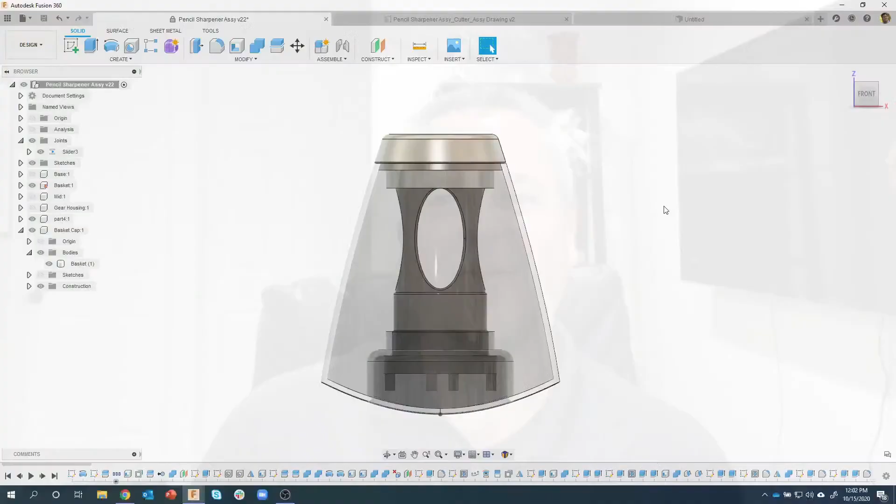So I'm going to start out by going over something you eagle-eyed viewers pointed out last time. We created this cap, and some of you mentioned that this edge was tapered, and so if we were to try and assemble this together, you would notice that that would be physically impossible. So kudos for those of you that saw that. I didn't take that into consideration. So how would we go about fixing this?

So what I'm going to do real quick is turn off this basket here. And one of the things I would probably do is try and take a measurement. So I'm going to try and find out what this angle is. But you'll notice when I click on those two faces, it doesn't give me an angle result. So I don't know what angle that is at. So, you know, I could have tried to rotate the face or added some draft or something like that, but I don't have that option.

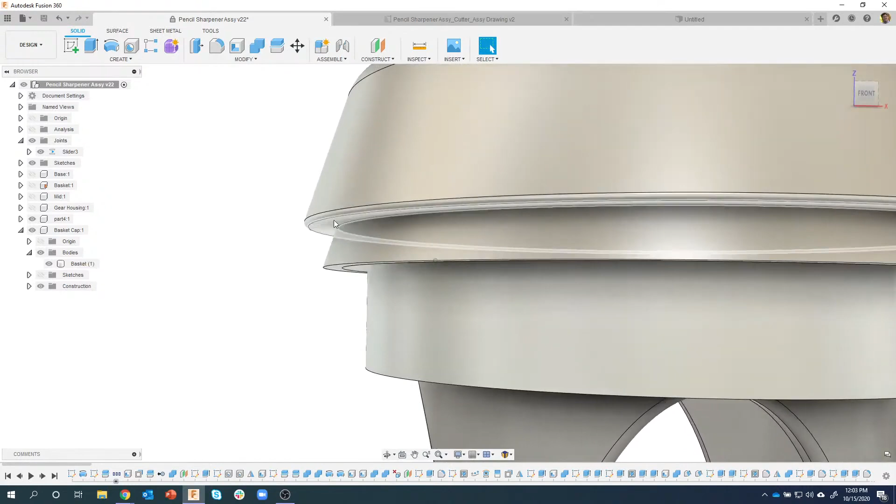So here's a cool little tip that allows you to quickly fix something like this. We're actually going to use surfacing to do this. And there's a command in here called Extrude. Now it's asking for a profile, and you'll notice it doesn't let me click on an edge. It only lets me click on a face. So I'm going to click on this face right here, and I'm going to start to drag up. Now what's kind of hard to see is that it's actually just a thin sheet. There's no thickness to it. And this will make more sense here in just a second.

So I'm going to drag it up, and I'm going to go at least to that height. I could go further if I wanted to, but I'm just going to go ahead and click OK and watch what happens over here. Actually, let me do that again. I'm going to make sure my basket cap is the active component. So we'll do that again real quick.

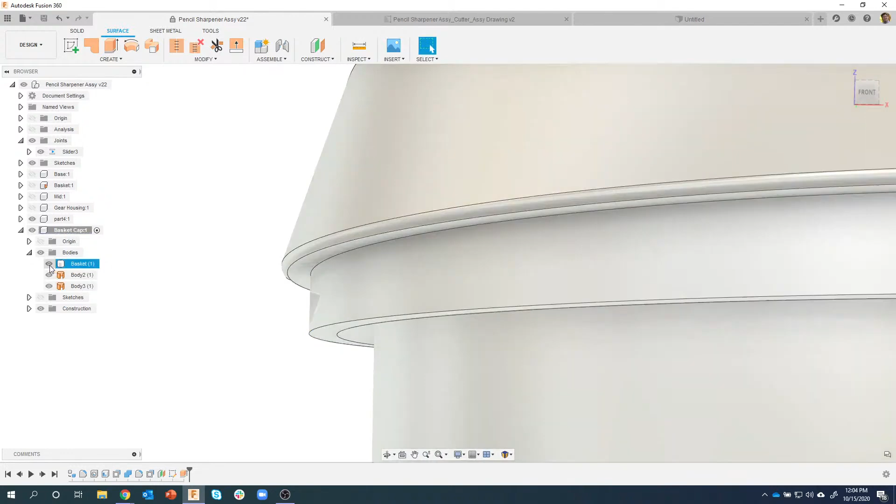I'll say extrude. I'm just going to snap to that face, say OK, and we can see that it added two separate bodies. In fact, if I turn off this basket, you'll see that there's no thickness to them. It took those edges and extruded it straight up. And that's pretty much what we want. I don't need this inside one, so I'll just go ahead and remove that.

And then I'm going to jump back and use one of the commands I've been using quite a bit lately that I really like, which is this replace face. So we're going to use this surface to help us replace that angled surface. So what's our source? It's going to be this angled surface. What's our target? I'll click on that guy there, say OK, and you'll notice that now that face is straight up and down. We used that surface to help us out with that.

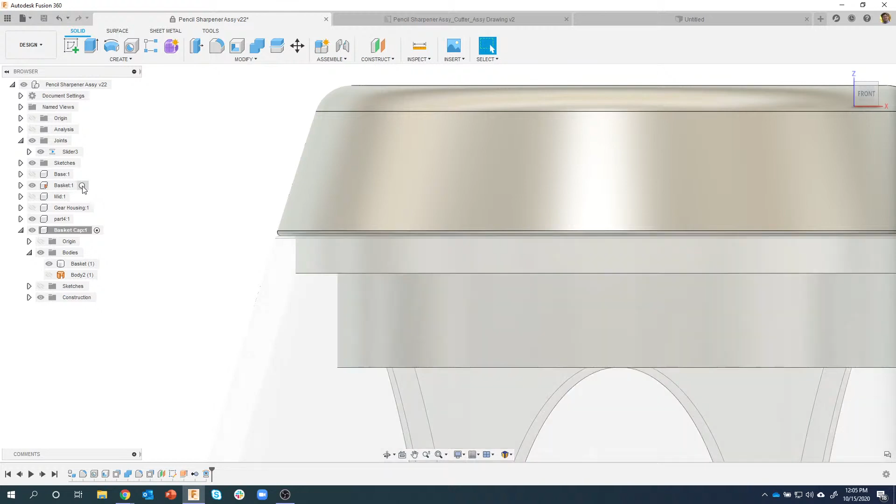So now let's turn the basket back on, and now you'll see it's still going to hit. So we need to make a slight change to the basket to allow some clearance there. So I'm going to activate the basket because that's the model I'm going to be modifying. We'll come in here and combine these two parts, and we'll use the cut command. Now I obviously want to keep the tool, so it's going to use this one that's kind of highlighted in red. It's going to use that to subtract or cut some material out of this blue part here.

So when I say OK, we can now see that we have a straight wall and we can slide down into that opening there. And if I wanted to, I could come in and add a little bit of an offset to this face here just to give it a little bit more clearance. So anyways, that's a quick way of fixing a problem, especially when I didn't know what the angle was or anything like that. So, okay.

What we are going to work on today is the sharpener part of the pencil sharpener.

And I'll be honest, this one kind of threw me for a loop. This one was kind of tough to make, and I came up with a couple different ideas. There's probably multiple ways we could do this, but this is one of the ways I came up with, and we might go a little bit long because there's quite a bit of geometry on this guy, so bear with me, and let's dive right in.

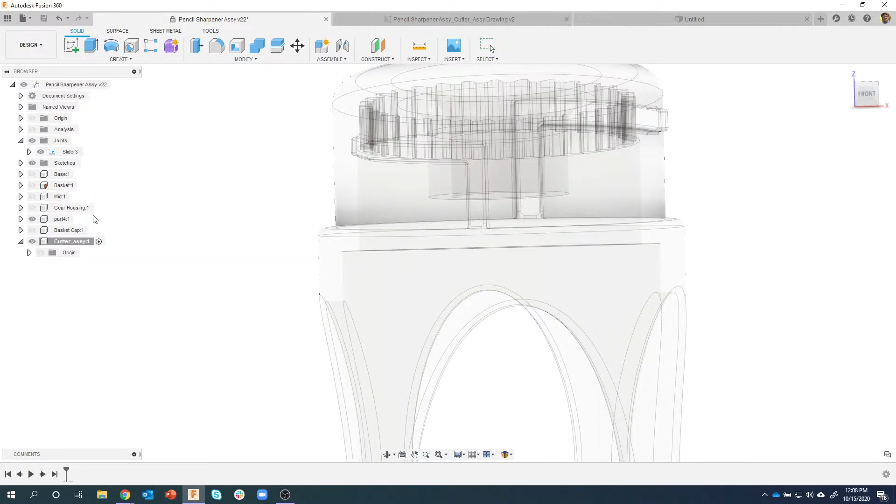So I'm going to start, it basically kind of fits around this little area you see kind of in here. So I like to do this in context design where I'm using existing geometry to help me with my design. So I can come in here and say create a cylinder primitive, and then I'm just going to get near that bottom face right there. You can kind of see how it's kind of highlighting that face. And then I can draw my cylinder.

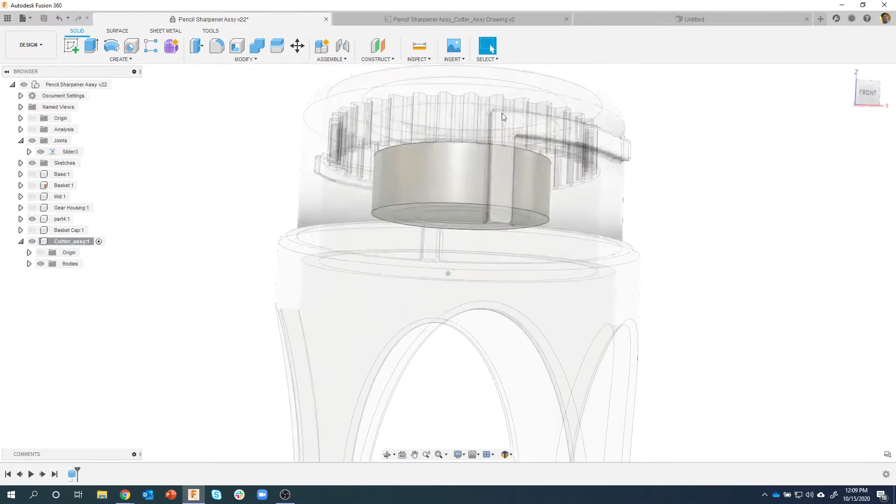So we're creating a primitive that's right on the bottom of that existing geometry, and I want this to be 0.625 in diameter, and I'm actually going to go up this direction, so it's in the negative direction in this case. So I'm going to say minus 0.2. Okay, so we're kind of using that existing geometry. You can see the existing geometry there and the new geometry that's kind of wrapped over it. So now I have something I'm starting with. I don't really need this part 4 anymore, so I'm just going to turn that guy off.

Okay, so let me bring this back up real quick. So basically what we just did is we just started with this part here, and again, I don't know how well this is going to focus, but I'm going to start building the geometry down, and then it's really kind of hard to see, but there's a tapered part that the pencil actually fits down into. So that's what we're going to be creating next.

And again, to simplify things, I like to use these cylinder primitives because I don't have to create a sketch, then create a circle, then do an extrude, and that would be 3 different features in my timeline, whereas in this case, I can pick on the existing cylinder, it knows where the center is, I can say it's 0.5 in diameter, I can start to drag and specify the depth. In this case, according to the drawing, it's 0.07, and you'll notice it's just a single feature in my timeline, so it keeps my timeline simpler.

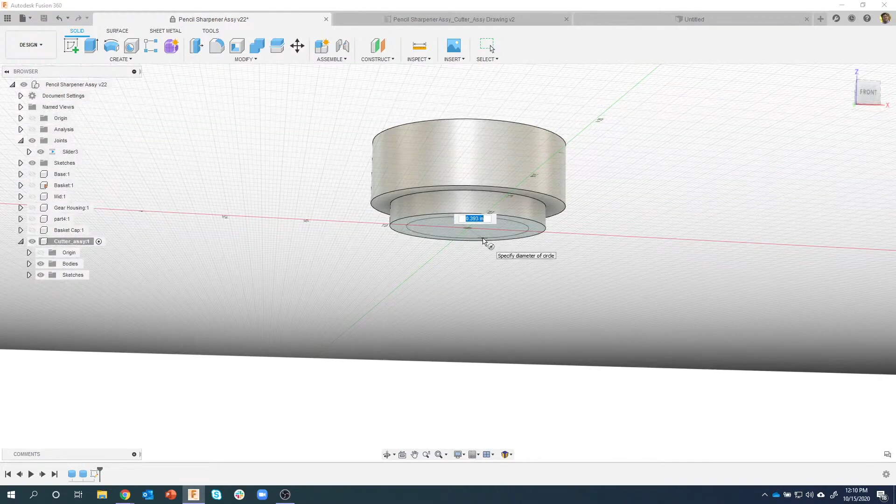And I'll do one more of those. I'll do a cylinder on this bottom point right here, and let's just go 0.795, and this is a fairly thin part, so I'm going to say 0.05. And you can see, again, this is that stacked cake method that we talked about last time. And if I look at the drawing real quick, here is what we just did, the diameters and the different thicknesses. So we did this guy, and then it's kind of hard to see, but this little thin one right here also. Okay.

Obviously we need a hole for the pencil to get inserted into. Again, I could create a sketch, but instead I'm going to pre-select that face, right mouse click, and you'll notice that the hole command is in this little pop-up. So I'm going to say hole, and it just randomly put it where I clicked, so it's not centered. So what I like to do is drag it, and then you'll see that point right there appear, and all I have to do is get near it, and it's going to snap to that point. And so it's perfectly centered.

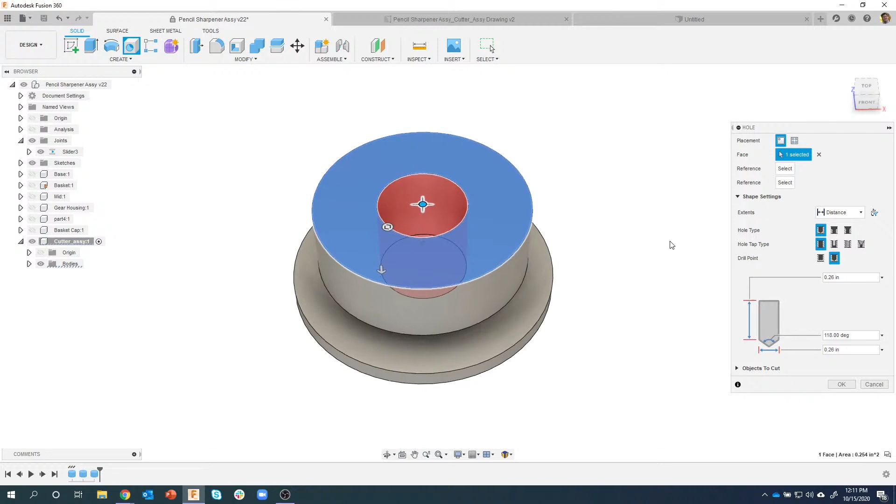Then I come in and I can say I want a flat drill point. I don't need it to be sharp. I want it to be flat. I'll specify the diameter in this case is 0.485 from the drawing.

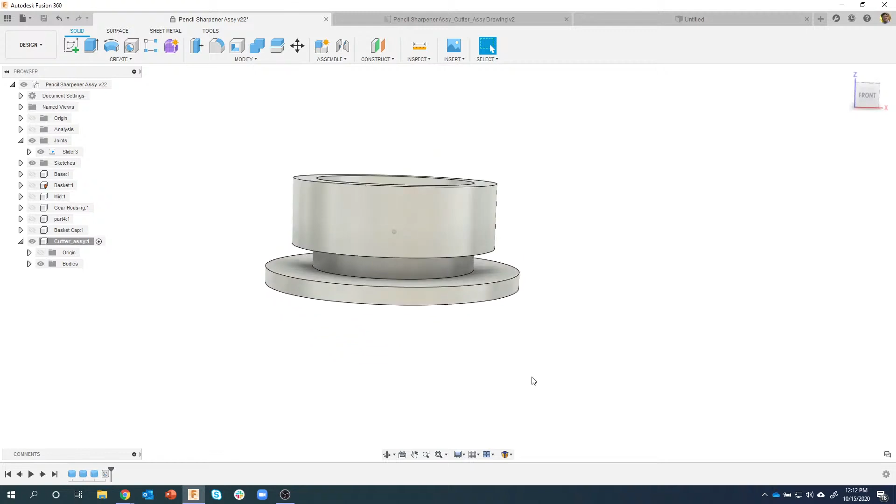And I want it to go all the way through. And you'll notice it says distance. Well, just like in the extrude command and some of those other commands, you can specify a distance, you can go to something, or I could say go through all, and you'll notice that it's going to figure out and go through all for me. So I now have a hole that goes all the way through. So simple timeline, and not a complex part, but you can kind of see we got some geometry going on here.

Okay, now we're going to create that tapered portion, and again, it's kind of hard to see here, but you can kind of see it tucked in all these little ribs right here, and you can kind of see part of it here. You can see it's an angle of 12 degrees, so that's going to come into play here real quick.

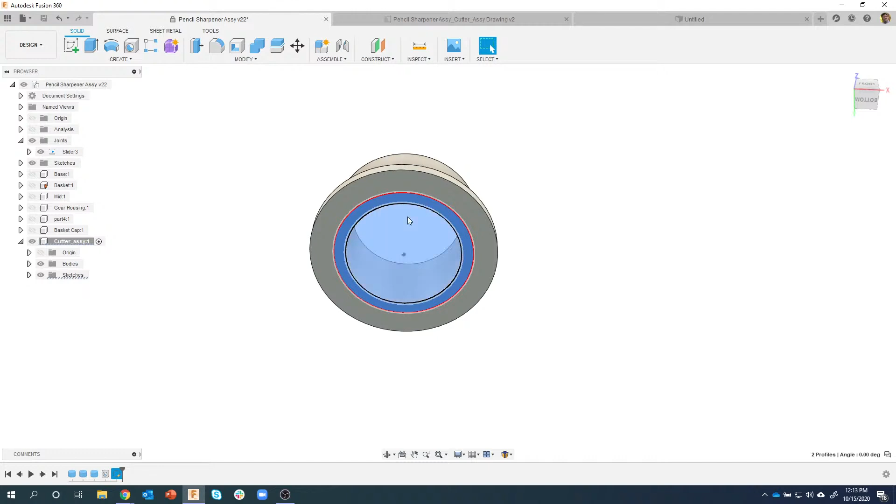Okay, so now I do need to create some geometry. I could do this as a revolve, but in this case I'm actually going to keep it simple, and I'm going to just create a sketch, draw a circle, because I know what the overall diameter is supposed to be. So 0.585, so we can kind of see what that looks like. And that's it. I'm going to, again, keep it pretty simple. I'm going to select both of these and say extrude.

Now, if I start to drag, we'll see it just creating a simple extrusion. But you'll notice that built into the extrude command, we have this taper angle. And that's kind of what this little rocker thing is right here. So you can kind of see as I drag this, I can actually change the taper angle. And again, according to the drawing, it's minus 12 for the angle.

And then the overall distance I want to go is 1.25. So we extruded down 1.25 at an angle of 12 degrees, a taper angle of 12 degrees. So you can kind of see how it's creating this point for me automatically.

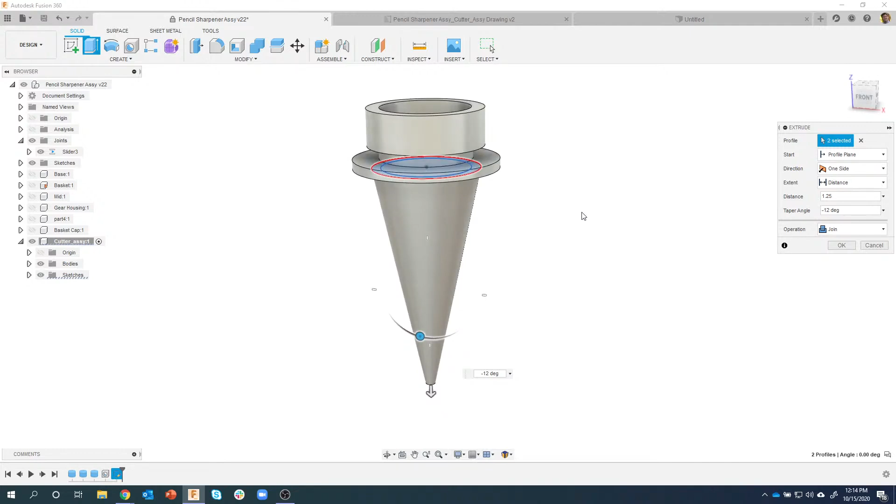Now, I've shown this previously in other live streams. I like to build in context, but sometimes I like to break things apart or keep things separate and then combine them back together. And so I'm going to be working on this part here. So instead of joining it, in fact, let me expand this open over here, I'm going to say new body. I'll say OK.

And now you'll see we have that region up there. That's its own body. And then we have this guy down here that's its own body. And that's going to allow me to make some changes to it, run commands like the shell command, for example, that I don't want to affect the top part of this whole area right here.

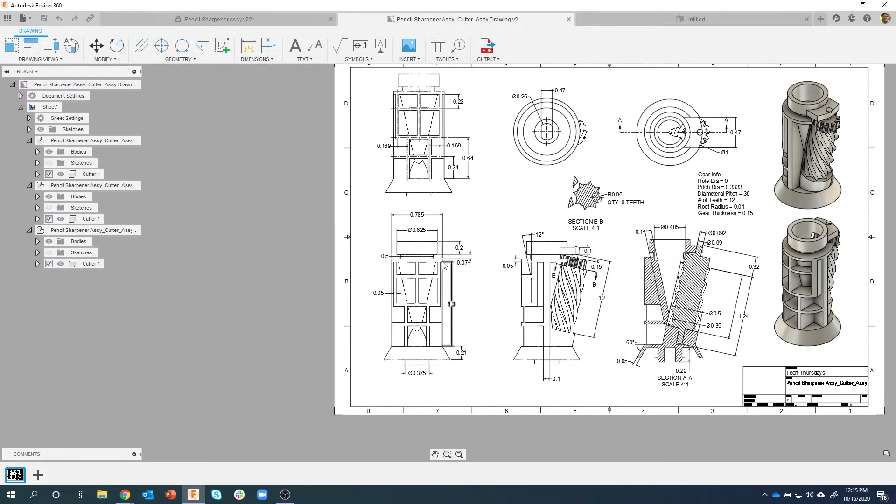Okay. Let me show the drawing here. There is a rectangular rib you can kind of see right here that's going to kind of go all the way across and slice through this area right here. So I'm going to create that next. And to do that, I should have stayed on the drawing. We can actually see that it's 1.3 inches. So here's the bottom of that rectangular rib. It's 1.3 inches from right here.

Well, if we take a look at this, we came down 1.2 inches. I need to go a little bit further. I want to create a sketch that's actually kind of below this point. So we're going to use the construct offset plane. So go ahead and click on that guy. I'll click on this face, and I'm going to start to drag, and you can see I can specify a distance. So I'm going to say 1.3.

And if we look at it from the side, we can definitely see that that's kind of below that point. So we're going to create a plane that's 1.3 down. If we look at it right from the side, you can kind of see that's where it is. Now I can create a sketch on that plane. So it's a great way to put a sketch somewhere that's not physically on the model.

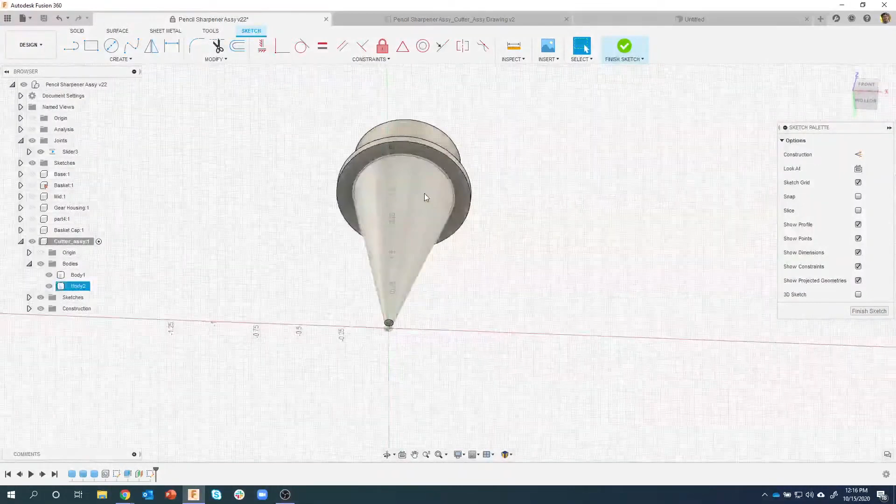In fact, I'm just going to kind of look at it from the bottom here, and I'll just create a rectangle, I'm going to do a center rectangle. Click on this guy, and I'm just going to go ahead and make this 0.1 wide. And you can see when I hit the tab key, it kind of locks in the width. So you can see that little lock icon next to the 0.1.

Now I'm just going to click somewhere on the screen to kind of show this. I want this to be on this edge right here. So I'm going to do a tangent constraint. I'll click on that edge there, and I'll click on this edge here. And you'll see it'll jump, hopefully. Yep, there we go. It'll jump that line up onto that edge. It made it tangent to that edge.

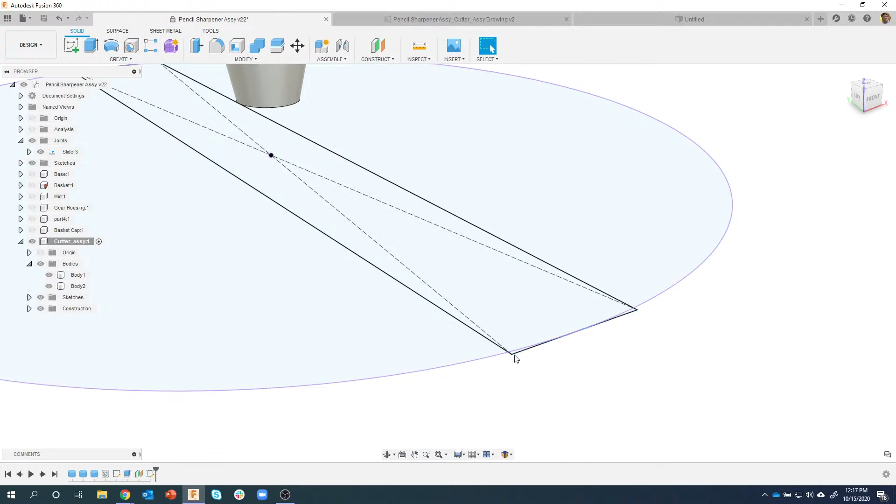Okay, so now I have this rectangular shape, and you'll notice, for you eagle-eyed people there, it extends out past it, but we're actually going to grab this profile, and it's going to use that curved edge. So it's actually going to follow that curved edge. I'll say extrude. I like to start to drag up, and you'll notice as we're dragging up, it's wanting to cut. But I don't want it to cut, I want it to join. Okay? And I want it to go up to that face. So I could click on that face and it'll snap up to that face, that 1.3.

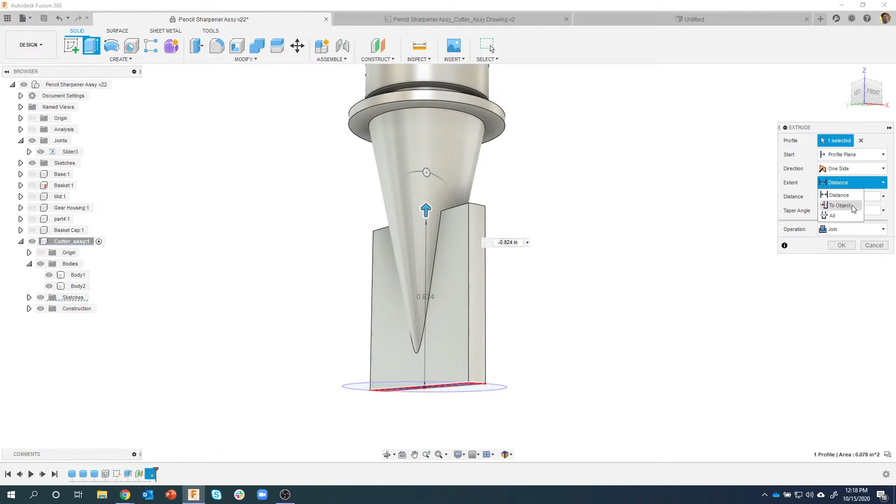Or better is to say to object. And I'll just click on that face, and it's going to extrude up to that object, that face right there. And the reason that is better is because if this thickness were ever to change, this rectangle knows it's supposed to stay stuck to that object, wherever that object might be.

Now, here's a little tip. So it says join. Well, notice it's touching this part here, but it's also touching this part here. So which part is it going to join to? So in this case, I'm going to turn off that guy. So the only option it has is to join to this part here. So just a little bit of a tip. You might want to turn parts on or off to make sure it's joining to just what you want. So I'll say OK. And we now have an interesting looking shape that looks like that.

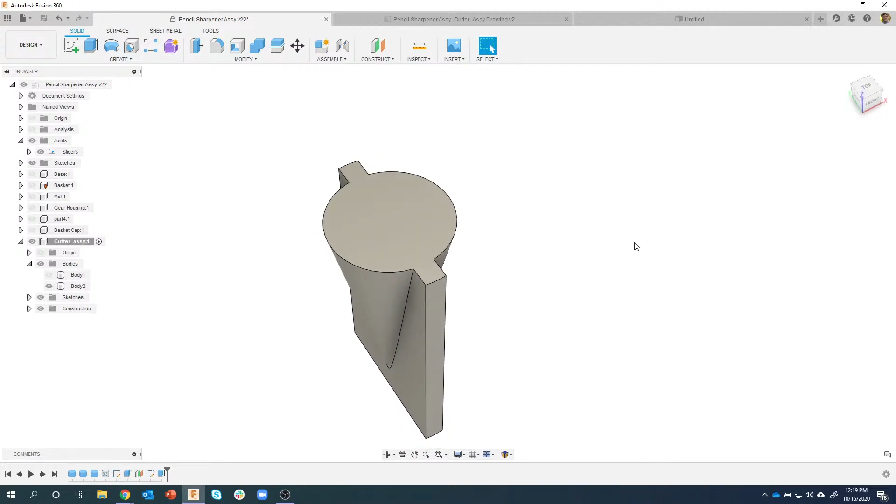Okay. Now here you're going to see why we made this a separate body, because now I want to, again, make it so a hole is in here. We're going to shell this out so the pencil will fit in here. So I'll come in here and pre-select that face and say shell. I'll start to drag so we kind of visually see what that looks like. But in this case, the thickness is 0.1. So you'll notice it's no longer shelling this little area here because this is 0.1 in thickness, so there's no room for it to shell. And so we get this nice little hollow cone shape.

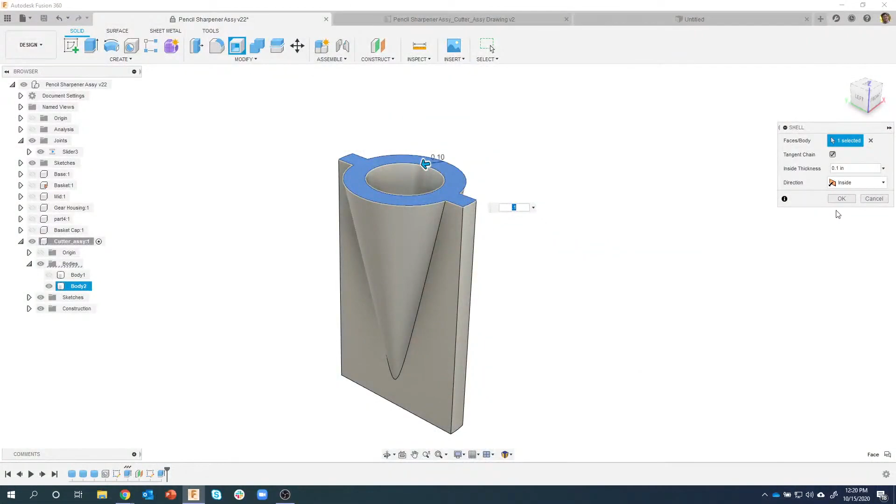So again, I could have done this with a revolve, but then I would have had to create lines at an angle, offset those, create an axis, revolve that around, etc., etc. Multiple ways you can get this done. Okay. Let's take a look at that.

So the next thing I want to do is I want to add this feature down here. And we can kind of see it's actually shelled out, and there's a cylinder inside there with a slot in it and all this kind of stuff. So let's kind of work on that area. So again, I'm going to keep it simple. I'm lazy like that. I'm going to do a cylinder primitive. I'll click on that face. I'll click on that center point right there and start to drag.

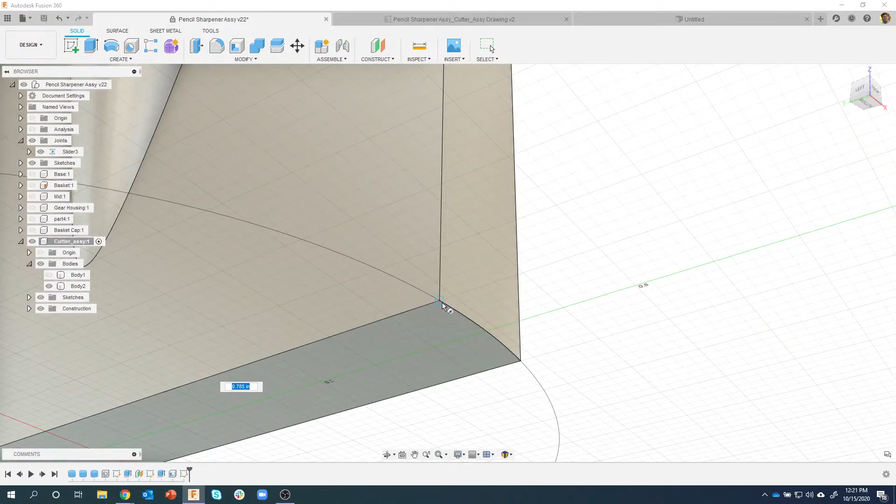Now I want it to be a very specific size. I want it to match that edge. And so you notice I can just get near that edge and it's going to snap to it. In fact, I could get to that corner if I wanted to. I'll go ahead and click. And so now it's going to match that curved rectangular extrusion. This guy here is supposed to be 0.21.

And again, I'm going to shell this guy out. I don't want it to affect this. So instead of join, I'm going to say new body. I used information from this other body to create this body, but now you'll notice that we actually have 3 of them. I'll turn this guy back on. You'll see we've kind of broken it into 3 different chunks. Okay.

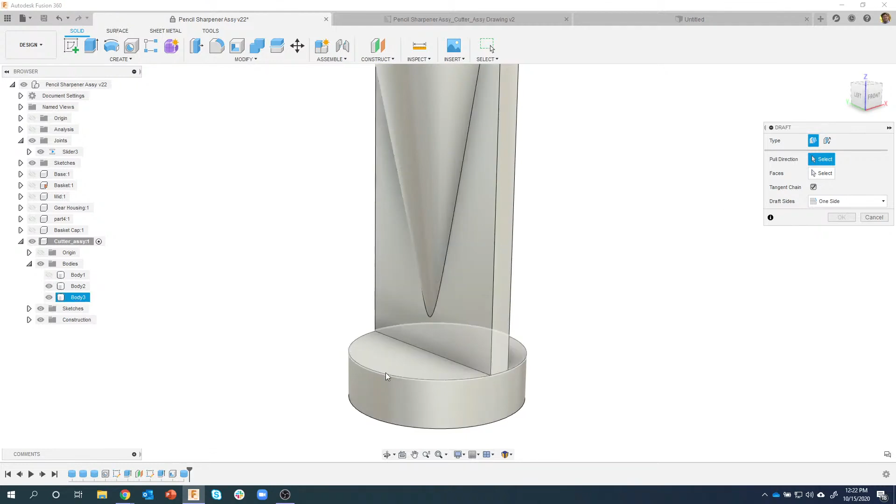Okay. I also want to taper or angle this. And the fastest way of doing that is with the draft command. So the pull direction is going to be this face here. You can kind of think of this pull direction as what edge is the face going to hinge around. So if I click on that face, it's going to hinge on the edges of that face. In this case, there's only 1.

What's the face? This is the face that we're actually going to hinge, or rotate, I should say. And you can see as I drag that, sure enough, it's hinging on that pull direction.

Okay. And I want to do an angle of 30. So just like before, I could have drawn a sketch, drawn a profile, revolved that around and gotten the same thing. But in this case, we just did a cylinder and then we just did a draft. And what's cool about this is I can come back and change the angle of this draft at any time if I needed to. Much simpler than going into a sketch to do it.

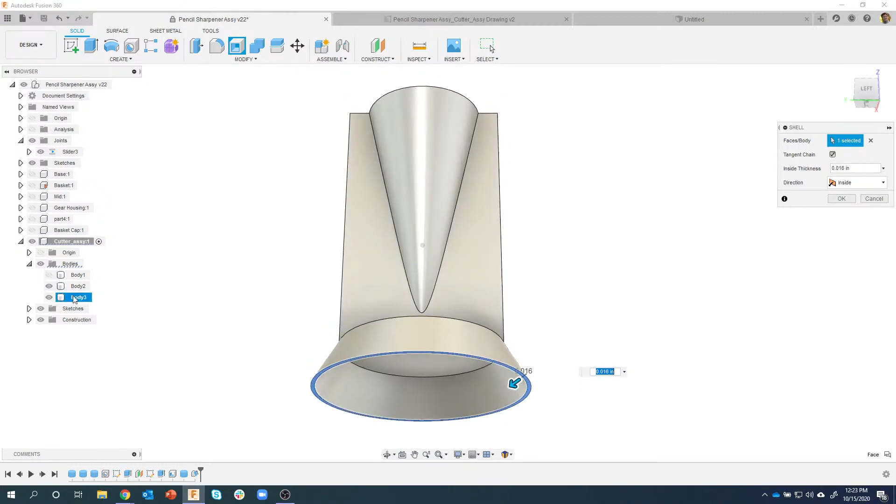Okay, I'm going to, again, pre-select, right mouse click and say shell. I'll start to drag and you can see it's only shelling this body. In fact, I'll turn this other guy off. It's not affecting that other part because we're only working on this particular body. That's kind of why I break these into smaller chunks. Okay, 0.05 is the thickness for that. I'll say OK.

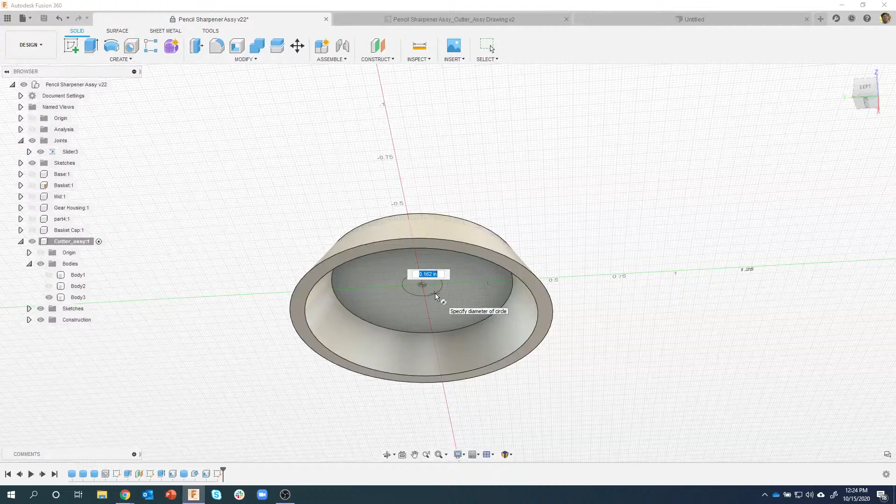And then I want to create this cylinder right here. We can see that it's a cylinder with a slot inside of that. So we can see it's 0.375 in diameter, 0.22 in depth. Okay, so cylinder, I'll click on that face. It finds the center of it for me automatically. 0.375 for the diameter. And then for the depth, I like to start to drag just to see is it a positive or negative number. It's 0.22. There we go.

Okay. So again, think about what this would have looked like for a sketch to revolve that around. I would have had to have drawn a profile that looked like this, with lots of measurements and angles and all that kind of stuff to create a profile to revolve around. I absolutely could have done that, but I think it's much, much simpler to break it down into its simpler forms. It's a cylinder, it's got some draft, it's shelled out, and then it's got another cylinder inside of that.

We're going to learn some tips and tricks like grouping things together and organizing things as we go through here. You'll see that a little bit later, but I could, for example, group all of this stuff together if I wanted to. But you'll see that more as we move on. Okay.

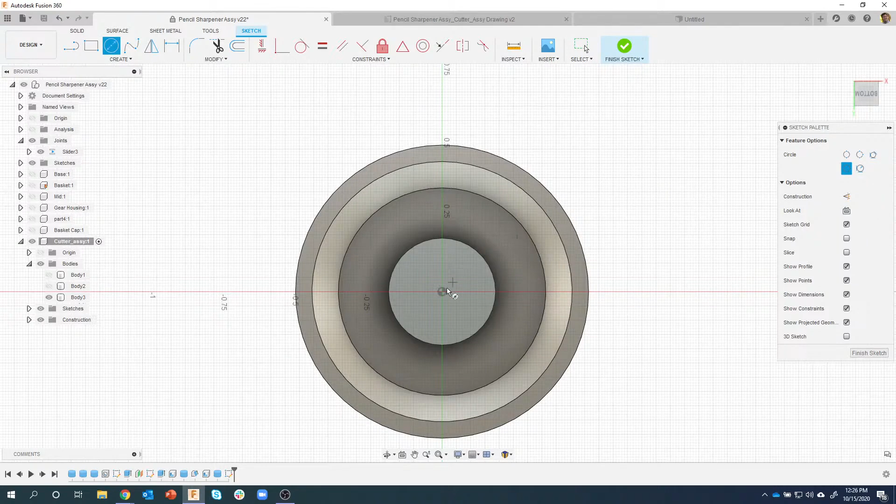Okay. So I'm going to do R for rectangle. I want to create a rectangle. Actually, I lied. Let's do a C for circle, we'll start with a circle here. And notice when I hit C for circle, it gives me all of my circle options there. If I hit R for rectangle, it gives me all of my rectangle options there. So I'm going to do C for circle. I'll click there, and we'll just do 0.25 diameter. Now I can do R for rectangle.

Now, I like to use the shortcuts, but as I'm doing these live streams, I kind of show where the menu is, because I know a lot of people are learning, this is the first time they've used Fusion, and I don't want you to have to remember all of these shortcuts, but as you get more proficient with the product, definitely use these shortcuts like O for offset and L for line and T for trim. It just really speeds things up.

Okay, so I'm going to do a center rectangle. I'll click on the center there. Now I am concerned about how wide this slot needs to be, so I'm going to tab over here and type in 0.17. Okay. Now no matter what I do, that rectangle is going to be 0.17 wide. And then I'm just going to click somewhere because I don't really care right now. I want Fusion to do the work for me. I want this corner to be touching this circular edge. So we'll use the Coincident Constraint.

You'll notice that some of my sketch is constrained and some of it is not constrained. As soon as I say I want that point to be touching that circle, you'll notice it's still 0.17 wide, but it brought that line down to be touching that circle, to be coincident with it. And because it's a center rectangle, it did the same thing at the top. So believe it or not, that one constraint has fully constrained this sketch.

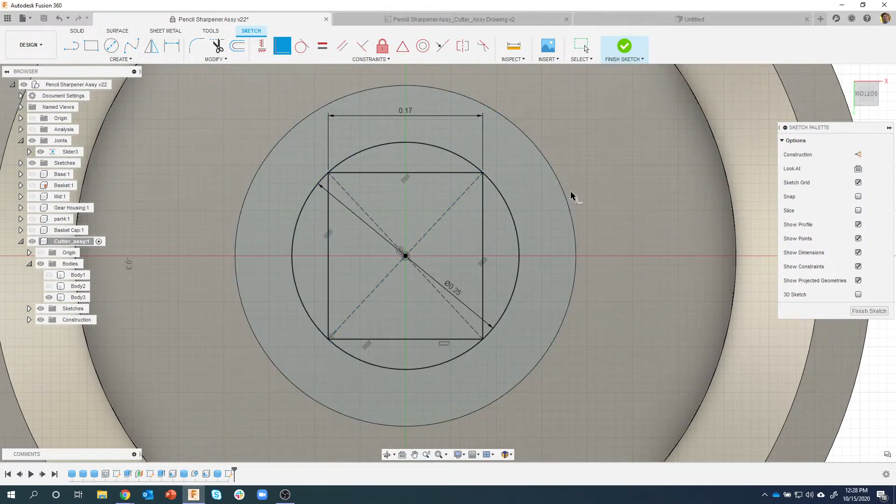And now I have a profile that I can use. I'm going to grab these three regions right there. I'll say extrude, start to drag, and we can see I could either extrude to add material, or if I push it in, it's going to remove material.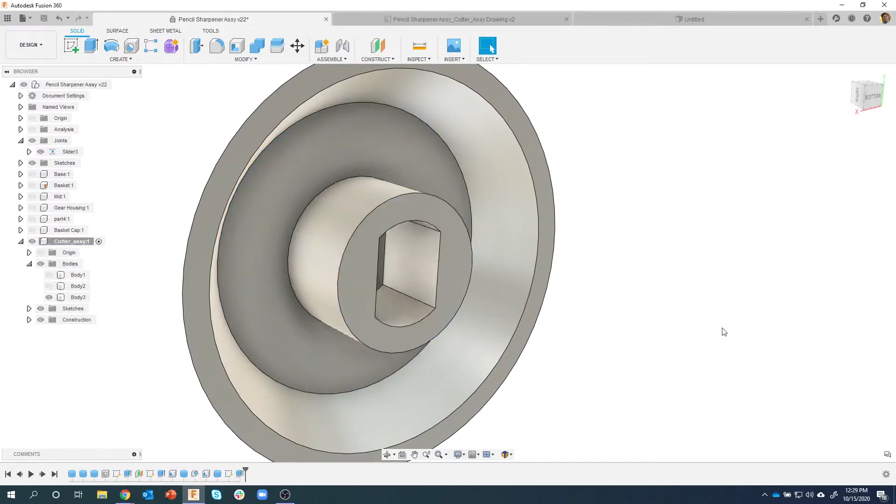And once again, instead of distance, I'm going to say I want it to go all the way to this flat face right here. So I'm going to click on that flat face, and we can see that sure enough, it's milling or cutting into that depth, whatever that depth is. So I'll go ahead and say OK, and we now have that recessed slot.

Okay, let's turn these other bodies back on. And I pretty much have the defining shape of this pencil sharpener. But instead of three separate bodies, I'm pretty much done with it, so I'm going to combine them together into one body. So I'll click on the Combine command, or if you don't have it as a shortcut up there, Modify, Combine.

The target, I'm going to click this first one, this body one. And then the tool, I'm going to click on that guy, and you'll notice it turned red. And by default, it remembered my last combine command that I did was a cut. But in this case, I want to join them together. And you'll see how these edges, there's not an edge across there anymore like there used to be. And then I'm going to go ahead and join that one also.

Now you'll notice Keep Tools is turned on. If I were to say OK right now, it would join them together, but it would also keep those extra bodies. And that can get a little bit confusing. I don't need them anymore, so I'm going to turn off Keep Tools and watch what happens to the bodies over here. When I say OK, we are now back to one body, combined all together.

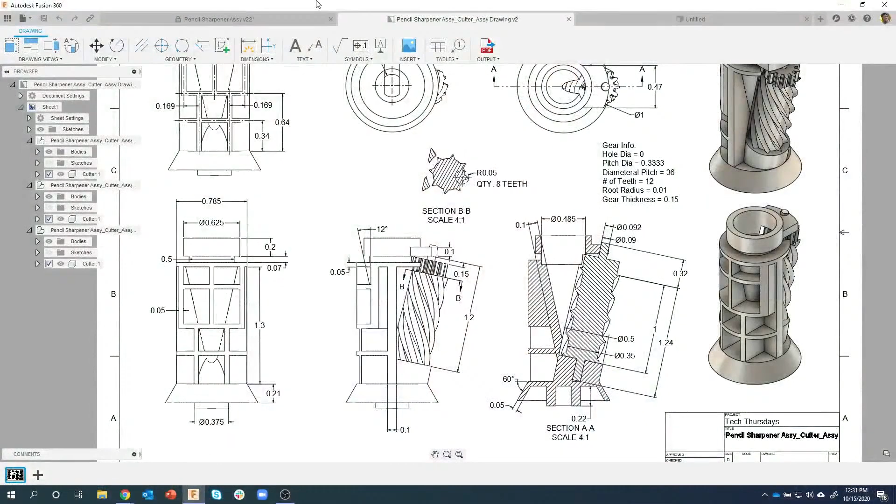So I came up with a different method, and I don't know if you'll like it or not, but we're actually going to use surfacing to do this. And hopefully you'll see some tips and tricks that you might be able to apply in some of your designs. Okay, so I'm going to come back here, and the first thing I want to do is create some geometry. But I want to basically extrude it to this part right here. So I need to create a sketch out here somewhere.

Under the Construct menu, we have a tangent plane. Okay, then it's going to ask for a face. I'm going to go ahead and click on this face, and you can see that it actually created a plane tangent to that face. And I can actually put it anywhere on that face. So it's stuck to that circular face, and in this case I'm going to leave it at 0.

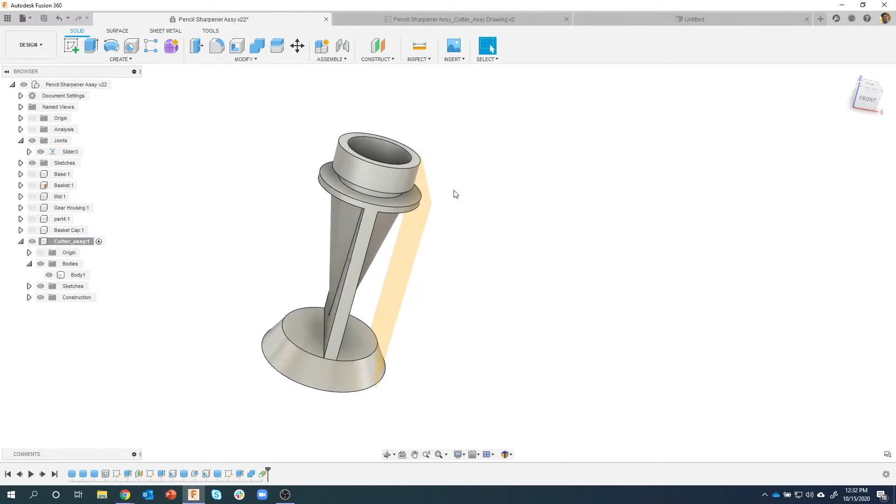But it's a really cool way of creating a plane on a circular edge at a particular angle. So I could say 45, for example, and now it's going to create that plane at a 45-degree angle. But we'll keep it at 0. Okay. So I now have a construction plane that's touching that face right there, and I can now create a sketch on that face.

Okay. On the drawing, in this view right here, you'll see a bunch of different dimensions, and you kind of see these center lines. And so we're actually going to be creating these center lines and then adding some thickness to them. So I'm going to just be referencing these numbers you see here when I'm creating this sketch.

I want to grab some information from that face, so I'm going to do P for project, and I'm going to make sure I'm doing just the specified entities, and I'm just going to grab this face. If I left it to bodies, it's just going to do the outline. I don't know if you can see that really well, but it's not grabbing any information in here for me.

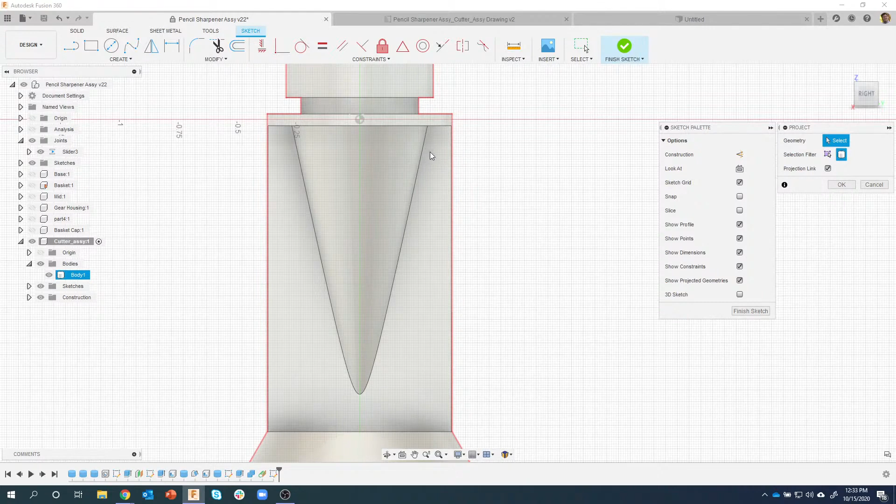By saying specified entities, I'm saying I only want to project this face. And so you can kind of see how these lines are being projected also, and nothing up here is. So I'm going to just say that's the face I want projected, and I'll say okay. We can now see those dots on the corners and the purple lines.

So I'm just going to draw a couple quick lines here. Now you'll notice it'll automatically catch to the center here, and in this sketch you'll see that that's the case. I want to, so I'm going to just click there. I'm just going to kind of randomly click around, and then I'm just going to add some dimensions later. So I'm just going to do something like that. Make sure I get to the center point there, and then I can say I want that line to be vertical. So you can kind of see how that worked.

There's a line that kind of comes across here. Again, I'm not worried too much about dimensions right now, but we'll come back to that here in a second. And then the same thing with this. I'm just going to draw a line down to catch there, and a line down to catch there. And then there's one final that goes all the way across, like so. So I'm just kind of mocking up what I want this to look like. And then there is one right here in the center that goes all the way up.

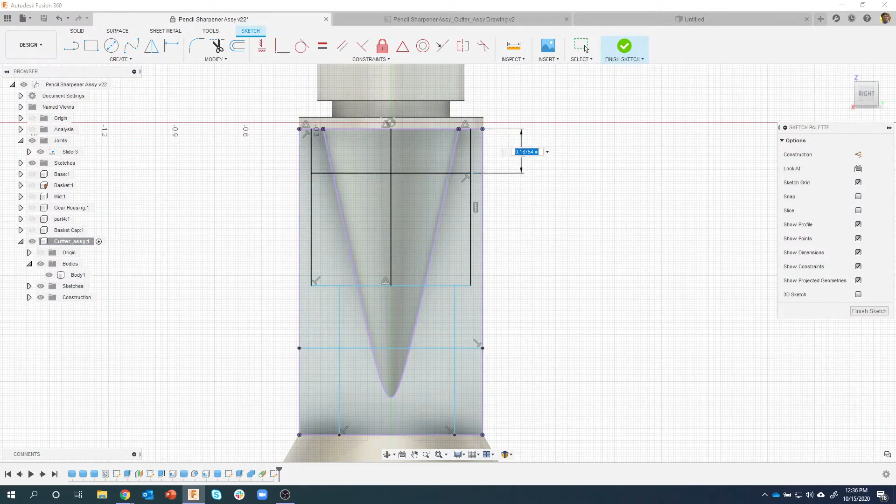Now I can start throwing some dimensions on here. So from this point here to this point here, that's supposed to be, again, just from the drawing, 0.22, and you can see how that line turned black, which means it's constrained. I'll do the same thing with this line here. That is supposed to be 0.64. I was actually pretty close. Same thing with this guy real quick. 0.34.

And then here's a neat tip. I've shown this before. I'm going to throw a dimension from here to here, and I'll just place it out here so it's easier to see. That's supposed to be 0.169. Okay. Then I'm going to do the same thing here. I'll place it there. And I want it to be the same. All I have to do is click on that existing dimension, and you can see I have quite a few dimensions. And when I hit enter, you'll see that that moved, and that number is the same as that number there.

And we can now see that all of my lines are fully constrained, which is exactly what I want to try and achieve. That way I know things are going to act the way I would expect them to if I ever made changes to the sketch. Okay. So now we've got this weird looking thing, and this is again where I was like, oh, I could just come in here and say, you know, create a web, but you'll notice a web is for internal type stuff. You'll notice it's kind of like inside that handle of that box cutter. It doesn't do it on the outside or external.

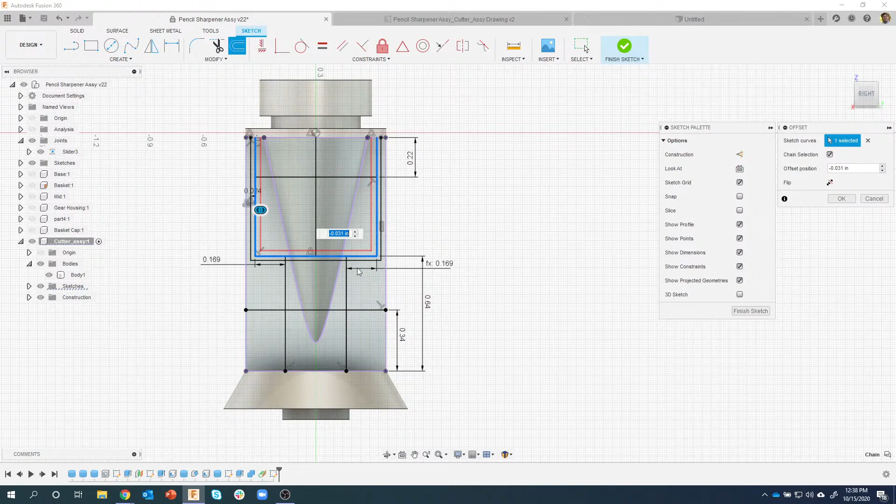And then the same thing with a rib. It didn't work in this case. So I was like, man, how do I quickly create these? And I didn't want to complicate my sketch and come in here and start doing offsets in one direction, for example, like this, and then do an offset in the other direction. I mean, look how complicated my sketch would quickly get, and that's just for this little guy right here, right? So I'm going to show you with surfacing.

So I'm going to jump into the Surface tab across the top. And under the Create menu, you'll notice that these icons are kind of orange, but they look very similar. Extrude, Revolve, Sweep, and Loft, just like you see in Solid. Extrude, Revolve, Sweep, and Loft. But notice those are blue icons. These are kind of these orange icons. So that's how you can kind of tell the difference.

So I'm going to say Extrude. Okay. Then I'm going to click on this edge right here. And I'm going to start to drag. And notice what it's doing. It's basically creating a thin, no thickness surface.

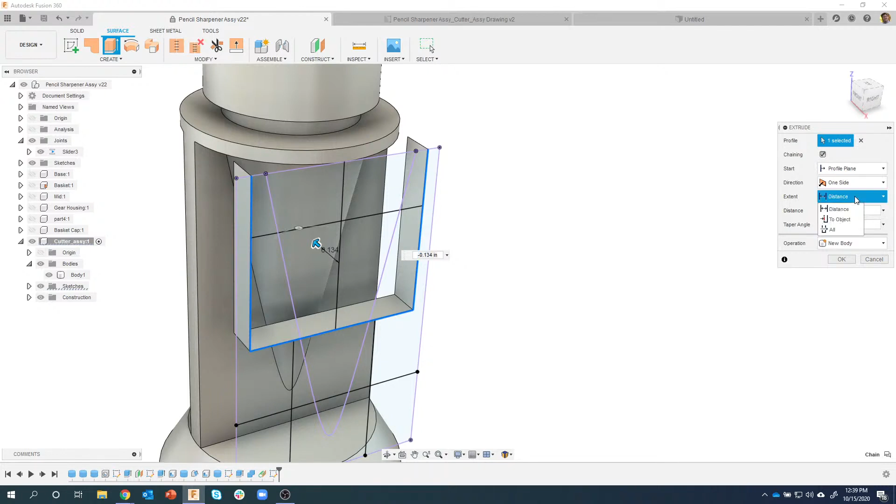It looks just like the regular extrude command. I'm going to say to object. Okay. And I'm going to select this cone as the to object. But you'll notice that I get an error message. That typically has to do with this chain faces. So you'll notice this says extend faces or chain faces. I'm going to click on chain faces.

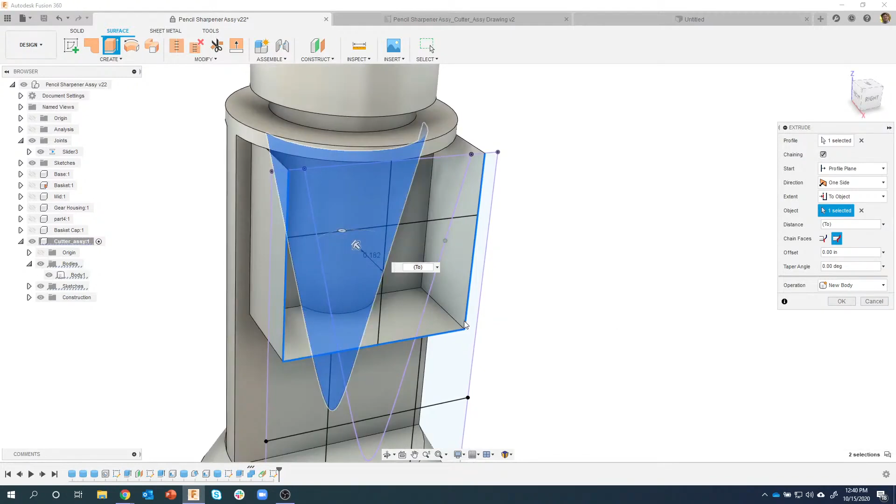Let me kind of explain what's going on there. Right here, and you can kind of see with this icon, I don't know how well it's going to share across the stream or not, but this extrude is basically stopping at the first edge or first surface that it gets to, and it does not continue on. Where this one, it extends all the way. And that's what happened right here. It went to this first surface and it had to stop, okay? Because these edges don't touch that surface. So by turning this guy on, I'm saying go ahead and extrude through those, or chain all the way through those. And so I get that guy.

Let me go ahead and add in some other profiles. So I'm going to select that line, and you can see, sure enough, it goes in. And you'll see that it's not extending through the cone. Okay, it's chaining to that angled surface. I'll go ahead and throw this guy in there so you can kind of see what that looks like. Then I'll throw this guy on there.

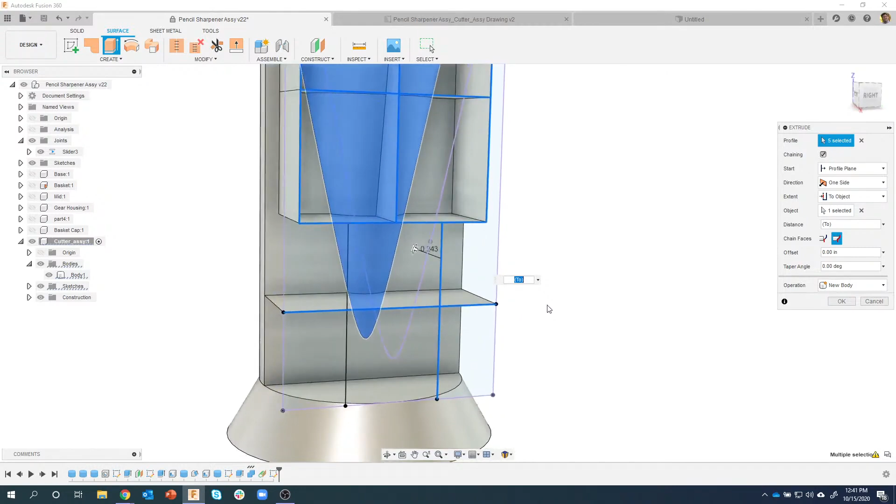Okay, then I'm going to click on this edge here, and you'll notice that I'm not getting a preview, and I get a warning. Some profiles failed to create tool bodies. Well, why is that? Well, it's expecting to intersect this cone, and it's physically not. Whereas all of these other lines are, this one is not. So I'm going to unselect that guy. And we're going to do this in a two-step process.

So I'm going to extrude all of those edges. I'm going to say OK. And notice over here what we get. We get a new icon. And they're open cylinders. Where a solid body is a closed cylinder, a surface is like an open cylinder. It kind of looks like a surface. Okay. I'm going to turn my last sketch back on.

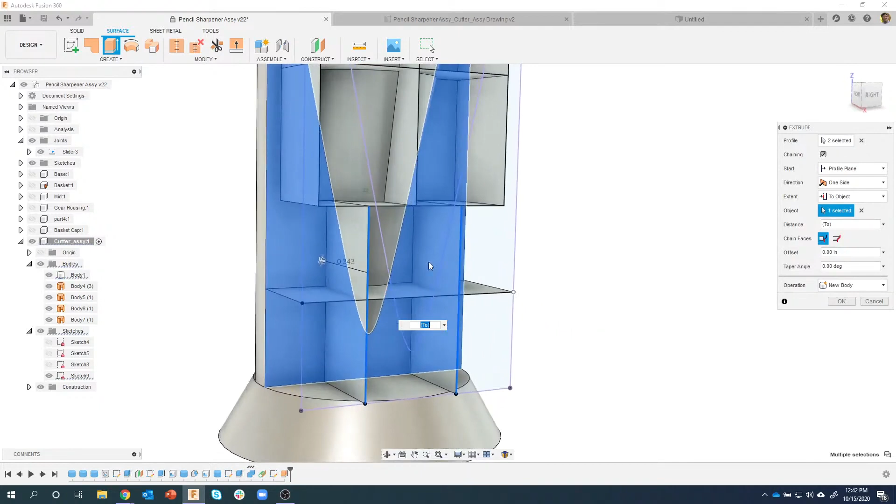I'll do that exact same extrude. What's my profile? These are my profiles. What's my distance? Well, I'm going to say to object, but instead of picking the cone, this time I'm going to pick that back wall. And sure enough, I get a nice preview of what that's going to look like. I'll say OK. And we now have a bunch of individual flat surfaces.

But what's cool about this is we can now use some other surfacing commands, such as the Thicken command. So here you can see under the Create, we have this Thicken command. What's the face? I'm going to click on, and I'm going to make sure chain selection's turned on. That way, if it can, it's going to select all of them. Okay, and you can see we can add some thickness to this. So it's taking that 0 thickness and adding some extrusion, basically.

Well, I want it to be equal, so I'm going to say symmetric. You can kind of see what's going to happen here. Okay. And then I can specify the thickness. Now, I want this to be 0.05 thick. So watch what happens when I type in 0.05. Well, it's going 0.05 in one direction and 0.05 in the other direction. And I want the whole rib to be 0.05 in thickness. So I need to go half of that.

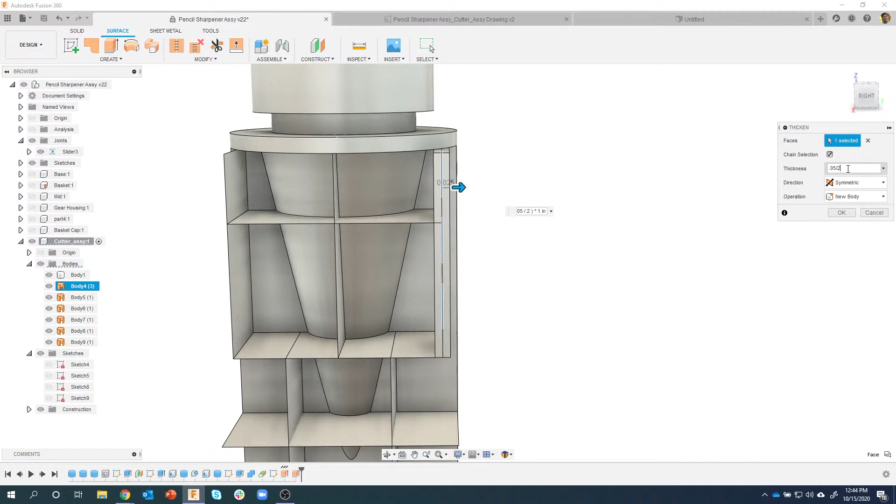I'm really bad at math. I could probably do it mentally, but I'm just going to come in here and say divided by 2. And again, that's probably hard to see, but I said 0.05 slash or divide by 2. And it's going to make that 0.025 in each direction. And so that's the result I would expect.

And now I can come in and start adding these other faces, and it's almost like we're using the web command. So I'm just going to grab all of these guys, and we can see that we created that. Okay, and then there's one more right there. Make sure I grab that guy. And I'm going to say OK. And notice what we got here. It is an actual body. So we use these surfaces to create that particular body. Okay.

Now, obviously, it looks weird. It's extending past the model, all that kind of stuff. And now I want to kind of curve it. Let me take a look at the drawing here. It's got a nice curved shape to it. Okay. So, just like before, we're going to use the replace face.

So I'm going to jump back to the solid. I'm going to say replace face. Okay. What's the source face? I'm going to click on that guy. And then what's the target face? I'm going to click on that guy. Now you'll notice it's thinking for a little bit and I get an error message. The face could not be replaced.

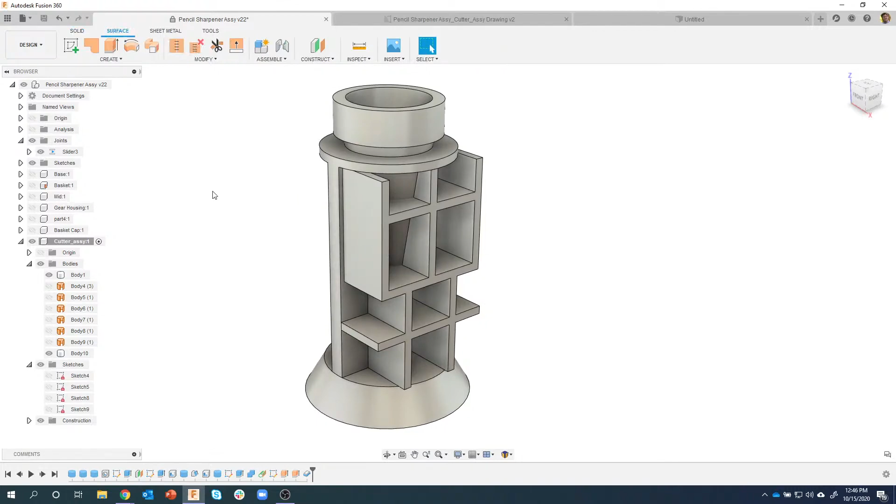I'm going to go back to my Surface tab. I'm going to create an offset of this curved face right here. So I'm going to click on that and watch what happens underneath this body. I'm going to leave the offset at 0. And what it did is it created, let me turn off these two guys, a 0 offset of this body right here. Kind of weird. I'm going to turn that off.

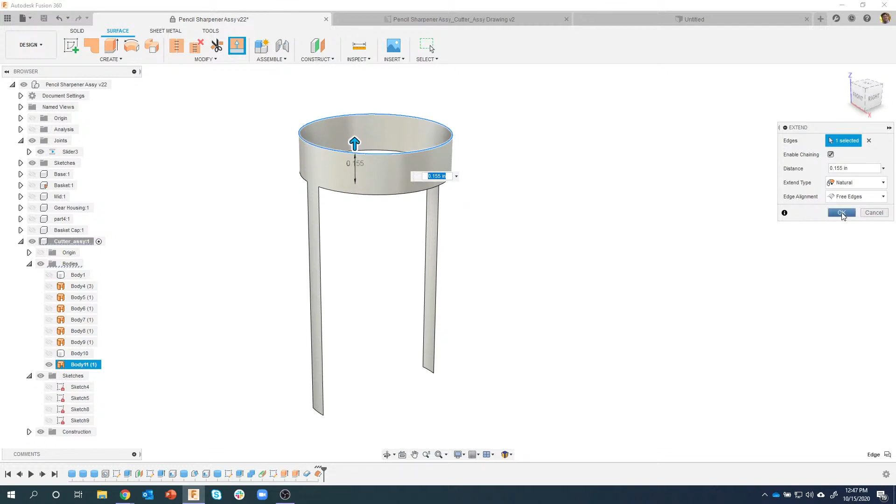Then I can come in here and say extend. And here's a simple example. I'm just going to click on this edge right here and start to drag up. And you can see we can add some geometry to that. I don't care how far. I'm just going to say OK. I'll do that extend again. And I can grab that edge. And notice we can bring that down. In fact, I'm going to grab both of the edges at the same time. I'll drag them down, and I can even click on a point, and it's going to extend those faces down.

So we used information from the body to create this surface right here. Hopefully you guys kind of see what's going on here. Now I'll come in here and do the replace face. What's the source face? So I want to change that. What's the target? It's going to be that guy. And check out what it did. Because this surface was bigger, it allowed me to replace that face.

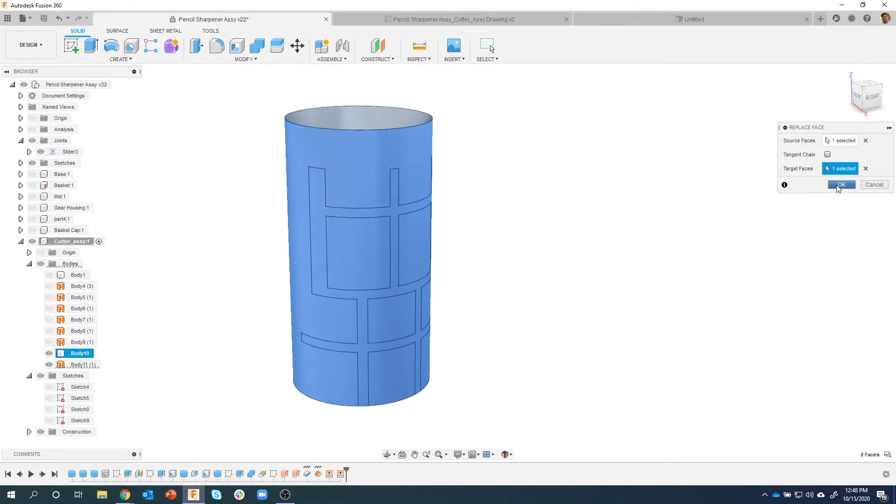And all I have to do now is turn off that surface, and you can kind of see what was left. And there we go. So some pretty complex geometry that we couldn't use commands like rib and web, but we were able to use regular surfacing commands, which is kind of weird because typically we want to keep solid bodies and all that kind of stuff.

So okay, we are now ready to combine this guy because it's a separate body. So I'm going to say combine that guy and that guy. We're going to join them together. I don't need to keep the tool, so I'm going to say OK. And now we're down to one body. But you'll also notice I've got all of these surfaces, and they still exist. They're just turned off. Okay? But it kind of complicates my browser right here.

So I'm going to select all of these guys, right mouse click, and say remove. Now I get asked a lot, what's the difference between delete and remove? 99.9% of the time you're going to want to remove stuff out. And watch what happens when I do this. I'm going to say remove, and notice they were removed out of my design. However, they still exist. In fact, you'll see all these little remove body features that were added in my timeline.

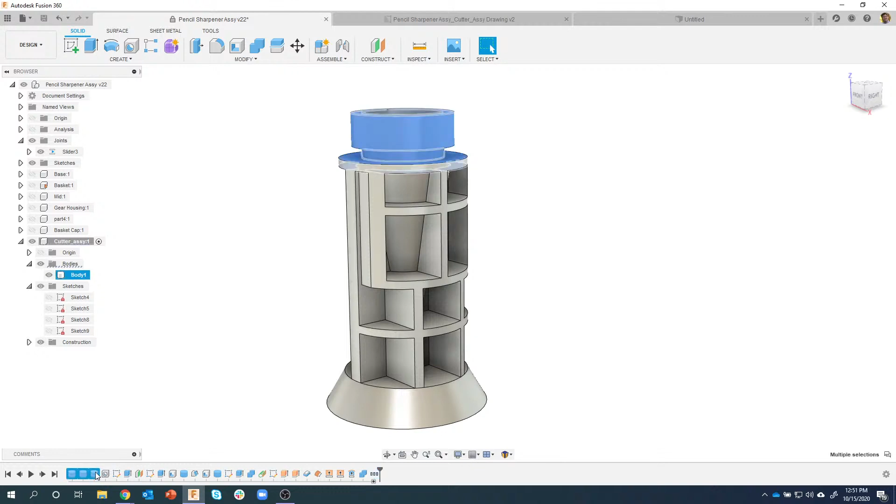And now if I hover over that, I can see, sure enough, those are the rib surfaces, for example. So it's kind of a cool way to organize some things together. So, for example, I could group those together because they were all similar. I mentioned, I could grab a whole bunch of features like this guy all the way through to here. I could group those together.

And you can kind of see how it's simplifying my timeline. It's not as lengthy anymore. And then I could come in here and I have access to all of these if I need to come back and change any of those. So hopefully, kind of a cool tip. Okay, we are running short on time here.

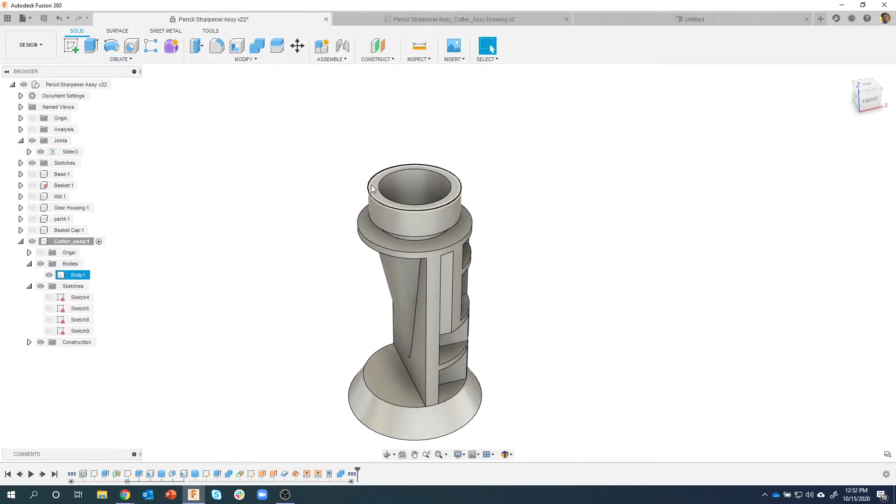Okay, so the next thing I want to do is we're going to start working on this region here. So we've done pretty much the whole part here, and now I want to create this little lip that's on the top right here. So I'm going to do something like this, say create a sketch. I'll zoom up so we can see what's going on a little bit better. Center diameter circle, and in this case, according to the drawing, it's 1 inch in diameter, so you can see just shy of the edge.

Then I want to do a center rectangle, just like we've done before. And the width of this needs to be 0.47. Okay. And then I'm just going to get near this edge right here. And you can see it would snap to that. But I want to actually go past this because I don't want it to be touching that edge. I want it to be tangent to that edge. So I'm going to go past and say tangent from there to there.

And we can see everything turned black. This line is now tangent to that circle. And I have some geometry. And I made a mistake. I put this sketch on the top face when I actually meant to put it on that face there. Okay? And this happens quite often. So here's another tip. And I've already created my geometry, my sketch.

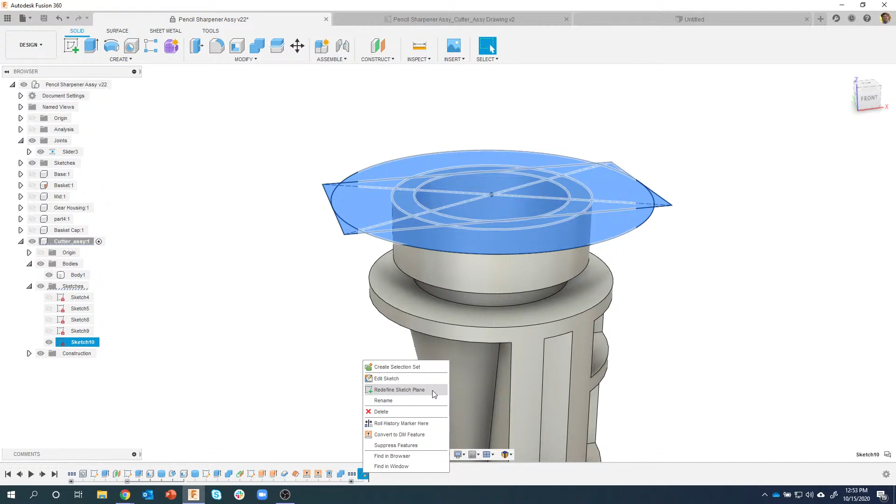I'm going to right click on my sketch and say redefine sketch plane. Then I can click on this face and you'll see it just brought it straight down, and my sketch is now in the correct location. So instead of having to recreate it, I was able to just redefine the sketch plane. Okay, we'll grab this guy, we'll extrude upwards. In this case, you can see it's a negative number. So I need to look at my notes for what the distance is. So it's 0.1. So I'm going to say minus 0.1.

And instead of creating it as a new body, I'm going to say join. So I just want it to join to that body. Okay. And we now have that little lip that we needed.

Okay, we're getting ready, and again, like I mentioned, we are probably going to go long on this one. I want to show how to create that cutter. I don't really want to separate this into two sessions, so hopefully you all can attend for a few minutes longer.

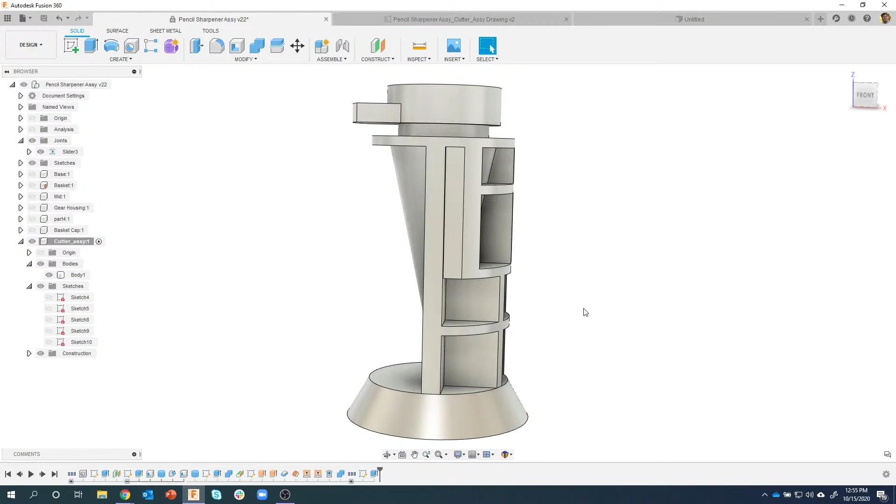So what I'm going to do now is I need to create some geometry that's going to help me define the angle of the cutter and all that kind of stuff. We need to create an opening in here so the cutter can actually get to the pencil. So I'm going to just create a sketch on one of these side planes, this right plane right here, or this front plane I should say.

Okay, and I'm going to project, but this time I want to project the whole body. So you'll notice as I hover over, it's basically going to trace around the whole thing, and that gives me some points, but I don't see all these ribs and stuff like that being projected. It's basically just almost like a silhouette.

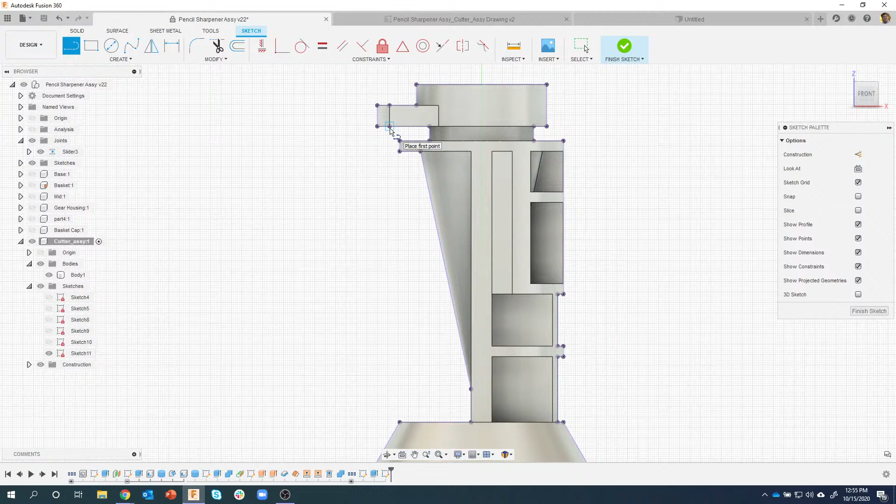Then I'm just going to create a line, and I want to catch this point right here. So I'm going to click on that point right there, and I'm going to come down to this edge right here. Now I don't want to catch to the center. I'm just going to catch to that edge like so.

I don't want it to be an object line, so I'm going to click on it and change it to a construction line. And I want it to match that line right there. So I'm going to do a parallel constraint. I want that line to be parallel with that line. And you'll see now they're parallel with each other.

Okay, so this is basically the axis that we're going to create everything with. And if you look at the drawing, we can see there's lots of dimensions and all this kind of stuff, but it's basically sitting on a little pedestal right here. And this cutter is going to kind of revolve and spin around that pedestal. So that's what I'm going to do next.

So I need to create a sketch plane along this line at a very specific distance according to the drawing, 1.2. So check this out. There's a neat construction here called plane along a path. Okay, so what's the path? That's the path there. And you'll see I can put that plane anywhere I want along this line.

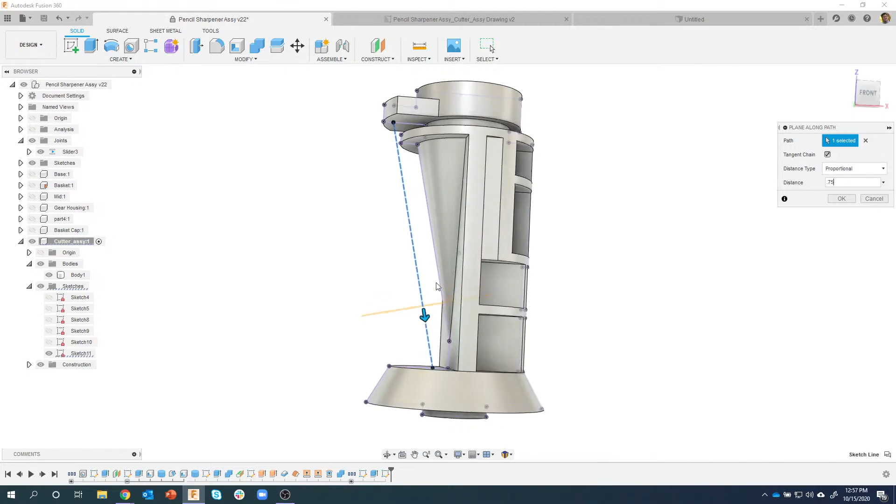And you'll notice it says proportional. So if I typed in 0.5, that plane is now halfway along that line or that path. If I said 0.75, it's going to be 3/4 the way along that path. But I can also come in here and say physical distance.

So from this point, I want to be a very specific distance, and in this case 1.2, and you'll see how that plane is now 1.2 inches from that point. And I now have a plane right there that I can use to create a sketch on. So let's just go ahead and do that. We'll say create a sketch. I'm going to rotate it a little bit isometric so we can kind of see what's going on here.

C for circle. I'll click that 0, 0 point right there. I'm going to do a 1/2 inch circle, and I'm going to do a 0.35 circle at the same time. I'm actually going to save some time here, and we're going to use one of these circles to remove some geometry, and we're going to use the other circle to define some geometry.

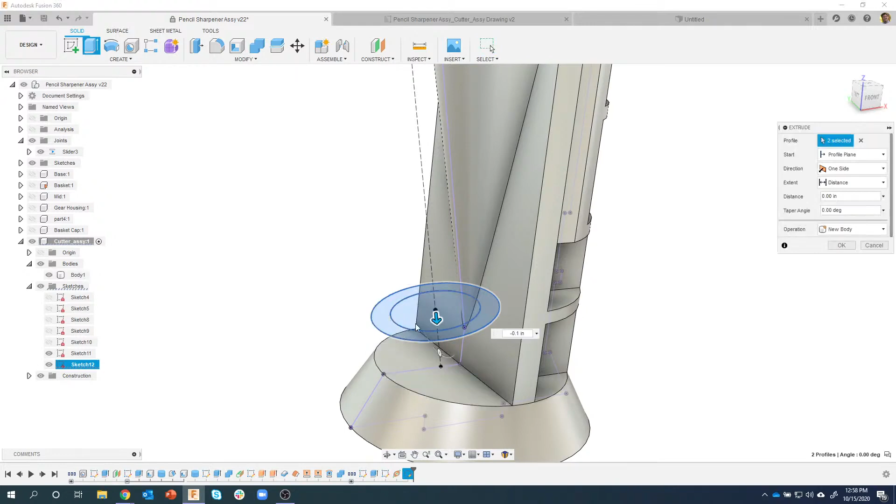Okay, so let's grab both these guys, extrude, and I'm going to start to drag, and you're going to see that we're physically cutting using both of these circles. We're kind of cutting away so we have a spot for the pencil to come through. And we're going to go up 1.5 inches. Oops, I lied. Not 1.5. 1 inch. 1.15. Look at my drawing here.

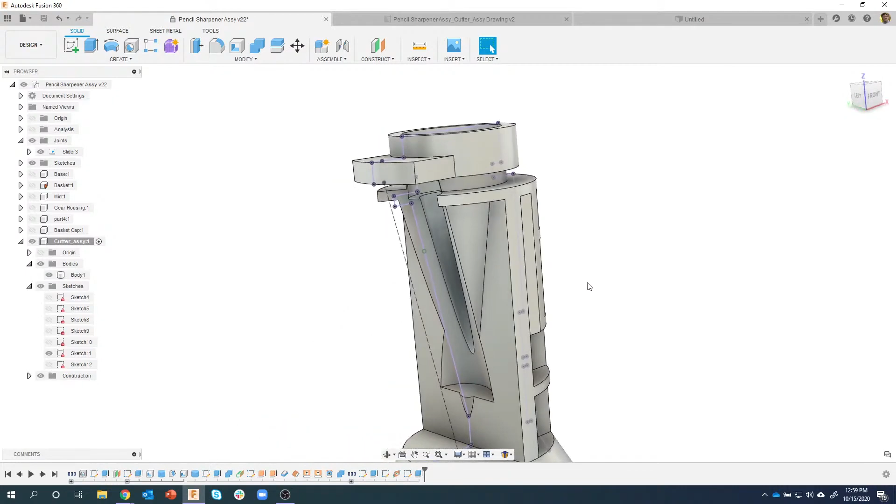Sorry, guys. So we can see we're cutting all the way up 1.15 inches, and you can kind of see how that's going to open everything up. I'll say OK. And let's take a look inside. We can kind of look down. We kind of opened up this area for the cutter to get to the pencil. I'll turn my sketch back on, and this time I'm going to grab the smaller circle.

And actually, before I do that, here's something I kind of like to do. I'm going to be creating another part, and you can see I named this component Cutter Assembly. Well, if I right click on this, I can say new component, because I want the actual physical cutter to be its own component. That's going to simplify my timeline substantially. So I'm going to say new component, and I'm going to call this cutter.

It's going to be active. I'll say OK, and you'll notice that this ghosts out in my timeline. I haven't done anything yet, but I now have a new component underneath this cutter assembly called cutter. Okay? And it's active. I can use existing geometry. I can reference edges and faces and all that kind of stuff.

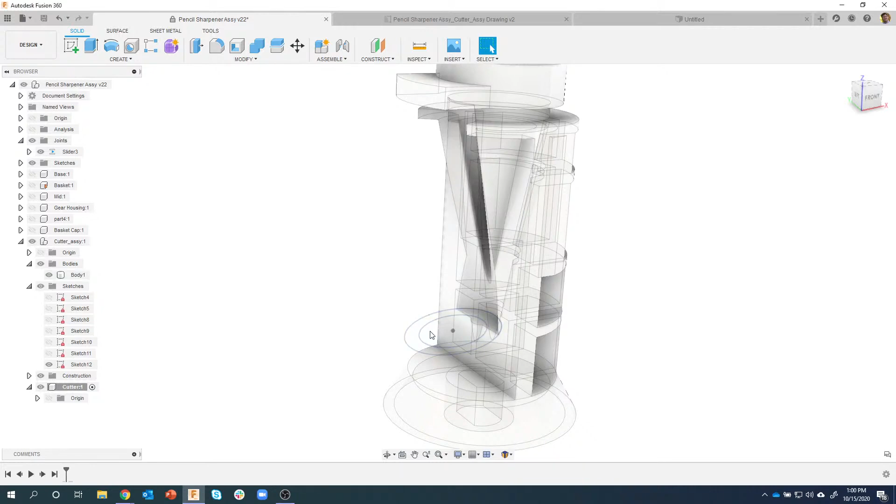So now I can use this profile right here. Okay? I'll say extrude. And we're going to make that 1 inch tall, and there's that guy. So that's kind of the basic shape of my cutter. Okay, the next thing we're going to do is to create the actual cutting edge. This is kind of cool.

So I'm going to create a sketch on this face right here, and to simplify things, I'm going to turn off this body, just to kind of turn it off for now. And this is just the cutter body that we're taking a look at. I'm going to use a polygon, inscribed polygon. And check out what this allows me to do.

I'm going to kind of get near the top here, and you can see it's going to catch to that edge. So I'm going to get fairly close to the top edge there. And then you'll notice it's creating an inscribed polygon to a specific radius. Well, I don't want 6 edges, I only want 3. And now we have a triangle.

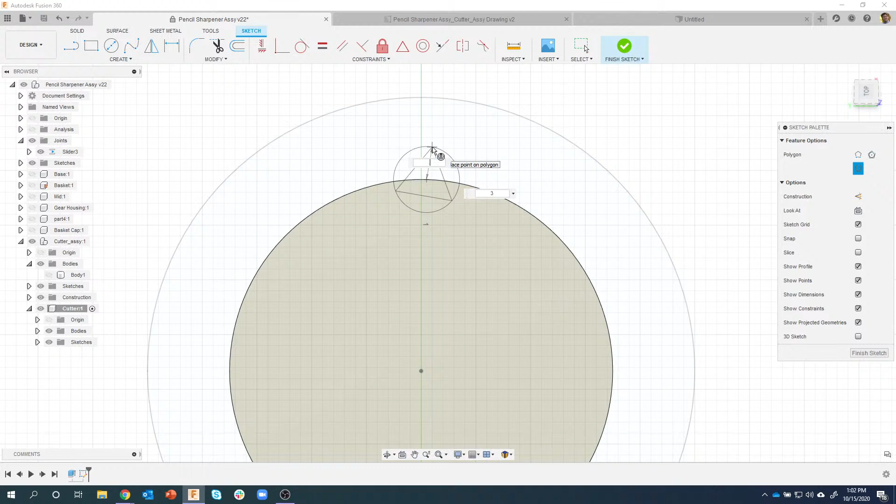Okay? Then I can come in and specify what the radius of that is supposed to be. In this case, 0.05. And then I'm just going to go ahead and click. It's not constrained. So I'm going to say I want this point to be vertical with the center point. And then I want this line to be horizontal. So I'm just going to go ahead and click on that line, and we forced it to be horizontal. And now you can see that it's fully constrained.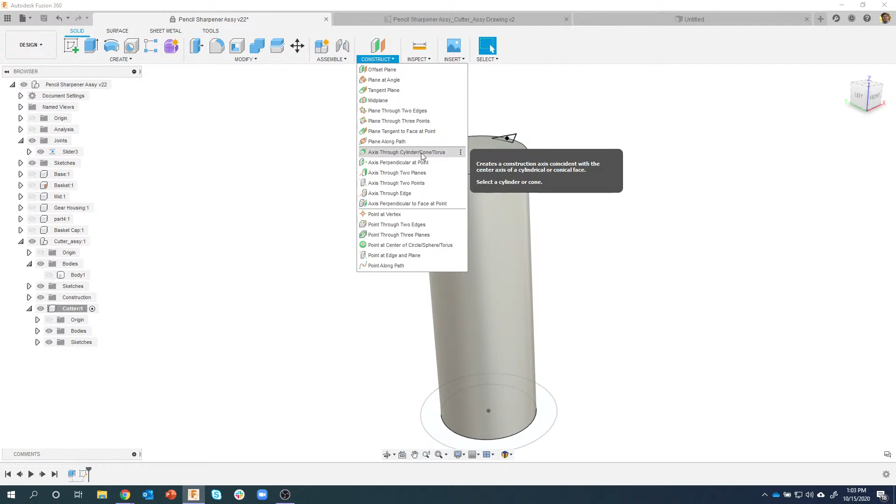Okay. Now we're going to use the sweep command because we're going to sweep that profile along a path. But I have to have a path to sweep along, and I don't in this case. Okay. So I'm going to create a construction axis through a cylinder. I'll click on this cylindrical face, and you can see this line, this axis that appeared. It's going right through the center of that. Now you would think I could use that as my path, but it's an infinite line. It looks like it stops, but it's infinite in length. So I can't use that as my path.

But I can use it to create a construction plane, because remember this thing is at a weird angle. If I look at it from the front, I can't really use a top view, I can't really use a side view or anything like that. So I'm going to create plane at an angle. I'm just going to click on that line, and you can see that it's going to slice through my cylinder along that line. And again, I don't really care what the angle is. It could be 22.2 as far as I care, but in this case I'm just going to leave it 0.

Okay, we'll sketch on that plane, and I'm going to project this geometry. I'll say OK, and we've now projected that geometry. Now I have something that I can actually create a line. So you can see I can grab that point there to that point there, and that is the exact distance I want to sweep this little tooth. Okay, so it took a couple steps, but I needed to get a path to sweep along.

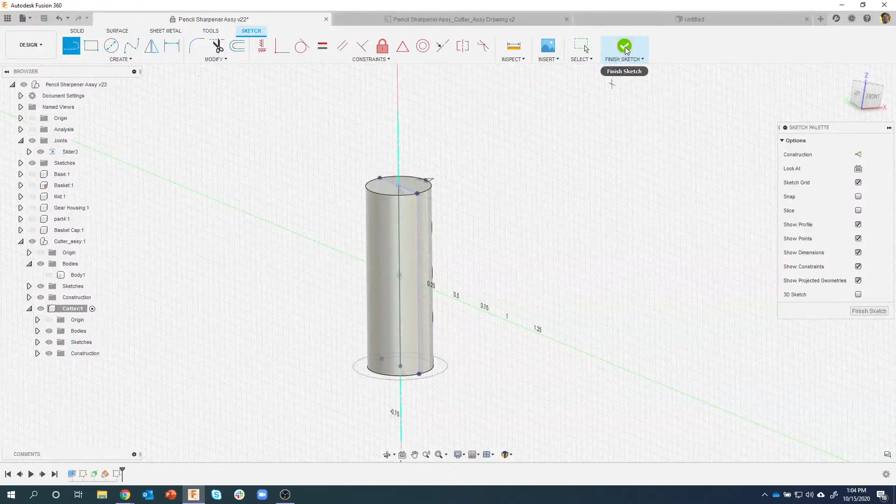Okay, here comes the fun part. I think you guys are going to really enjoy this. So I'm going to use the sweep command. So under the create menu, sweep. Now we're going to do a single path. It's asking for the profile, so I'm going to go ahead and select that as the profile. And then it's asking for a path. Kind of rotate a little bit so you can see what's going on here. What's the path? Just this line right here. So you'll notice it's not letting me select the axis up here, but it is letting me select that line. And so it's going to take that profile and sweep it along that path.

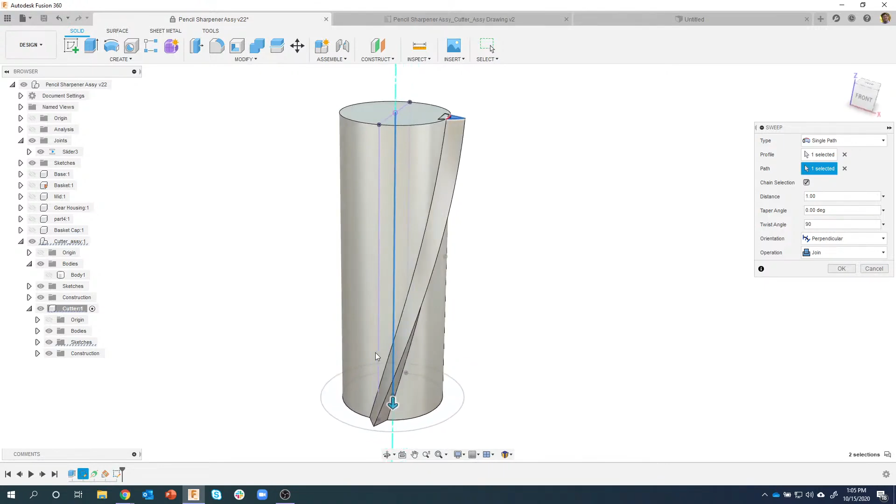Okay, but we want it to twist, and notice right here we have a twist angle. So if I typed in like 90, you'll see that it's still going to sweep it along that path, but it's going to twist around that path 90 degrees. In fact, we're going to go minus 180 because I want the blade to go a certain direction. But so you can see, if we look at it from the top, it's taking that profile, it's sweeping it around 180 degrees.

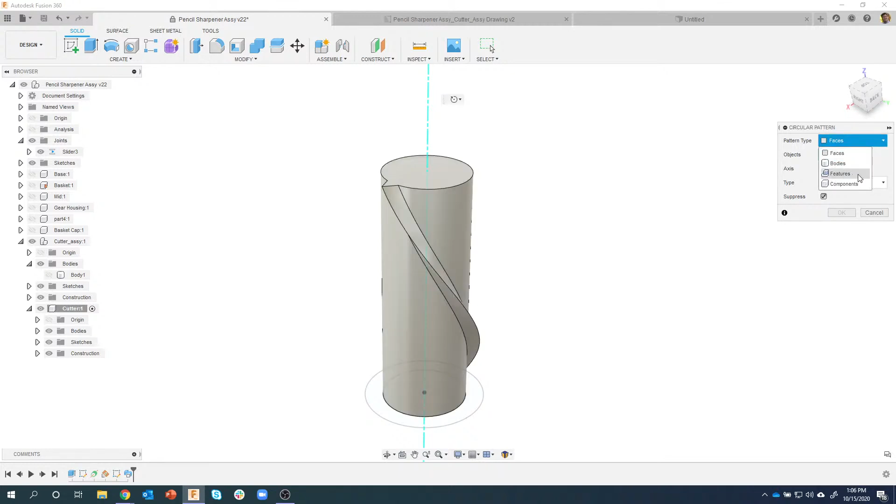Okay, so now I have this one tooth. I'm going to come in here and say circular pattern. Always, always, always check your pattern type. I don't want to do faces. I'd have to manually click all those faces. I'm going to come in here and say features. What's my feature? The sweep feature. What's my axis? I can click on that guy there. I could click on this surface here. It really doesn't matter. It gives me a preview of what that's going to look like.

And I want to go to 8 teeth. I'll say OK, and boom. We now have that one profile patterned all the way around 8 times, basically. Okay, so now what I'm going to do is, again, kind of running short on time, we're going to put this little gear on the top, and then we're also going to put the shaft that this revolves around on there.

So I'm going to go back to this original sketch right here. I'm just going to create a small circle. So instead of having to create another whole sketch, I'm just going to reuse this one because it's just a simple design. So 0.09, like so. Okay.

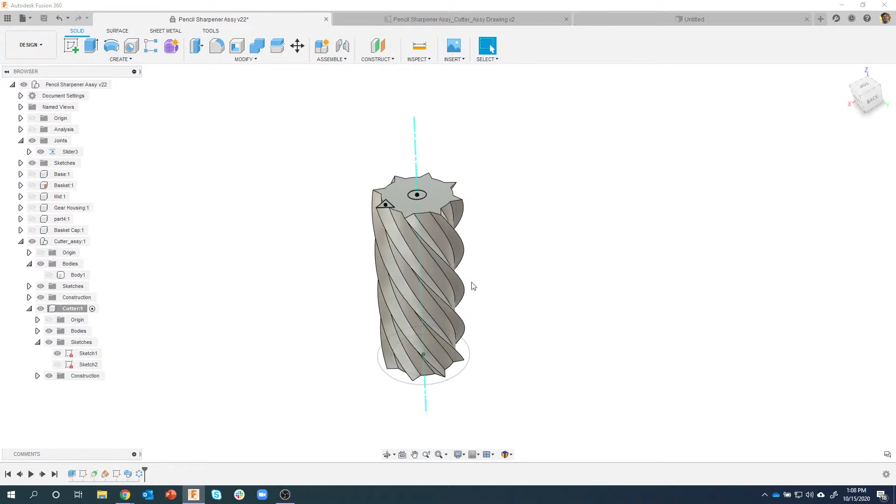And again, notice how simple my timeline is because we're working on just the cutter component. So there is that sketch, and I'm going to use that circle to kind of create that shaft. Okay, so we'll do an extrude. Hopefully you'll learn a new tip here. So I'm going to say extrude. Oops, sorry. Extrude. I'm going to start to drag up.

Now typically we do one side. I can come in here and say 2 sides. And this is actually going to allow me to extrude in 2 different directions and 2 different distances. Now obviously I don't want to cut, so I'm going to say join. And in this distance, you can kind of see that number changing right here. And in this distance, you can see that number changing down there.

So I could come in, and again, according to the drawing, this needs to be 0.32 up. And this one needs to be 1.24 down from this surface right here. So it's going almost 1 1/4 down, and it's going 0.32 up. So it's kind of a cool way of making the 2 different distances in the same command. So I'm going to go ahead and say join.

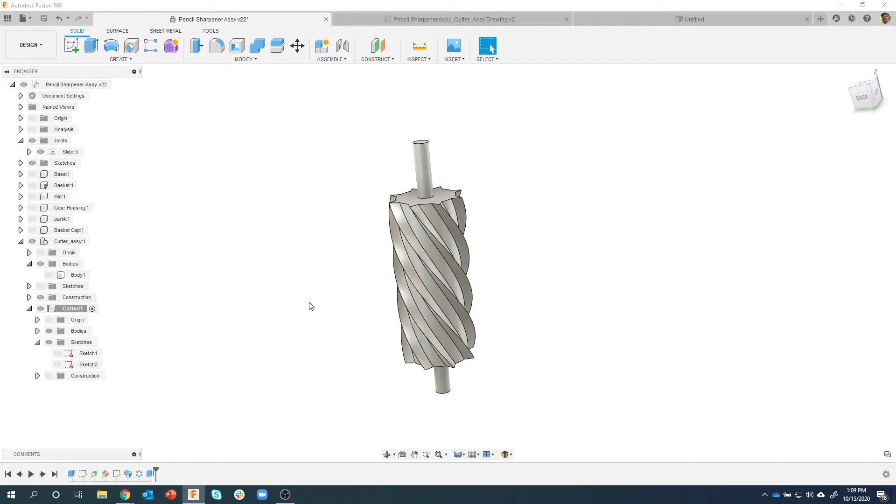Okay. Let's turn off our construction, let's turn off our sketch, kind of simplify some stuff here. There's our cutter. The next thing I want to do is to put that little small gear. And I showed this last time. I used this add-in called FM Gears. So I'm going to go ahead and click on FM Gears. And I'm going to create a Spur gear.

Now, there's a lot of information that I need to add in here, and this is actually a trick that Angelo showed me. He uses this a lot. You'll notice the comments down here. It's usually folded down. If I expand this open, you can see that I have added some comments in here. And Angelo uses this quite a bit for when he's designing parts and he knows he's going to use a special tool or a special cutter, he might add that into the comments and say, use a blah, blah, blah cutter, thread pitch is this, etc., instead of having to use post-it notes or a notebook, you can actually capture it right in your design.

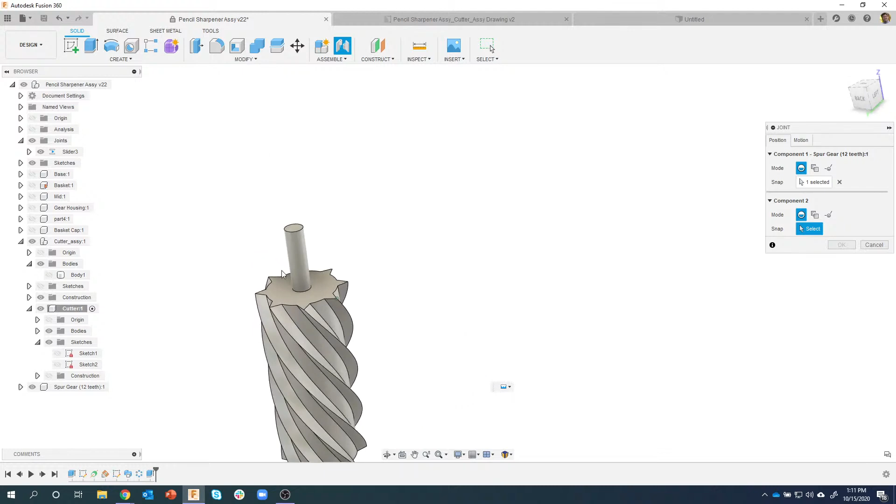I can fold this comments back down. And I'm just going to do a quick joint command. I'll grab the center of that gear. And I'll grab the center of that face, and you'll see it's going to bring that gear and place that using the joint command. Okay. So that looks good. I'll say OK. And like I mentioned before, on the drawing, I put the information of what that's supposed to be.

Now, these are two separate components. I'm going to expand this open. You'll see bodies in here, etc. Watch what happens when I combine this together. So I'm going to say combine. I want to add the gear to the cutter. So my target is going to be the cutter. The tool is going to be the gear. And sure enough, I want to join them together. I'm going to say OK.

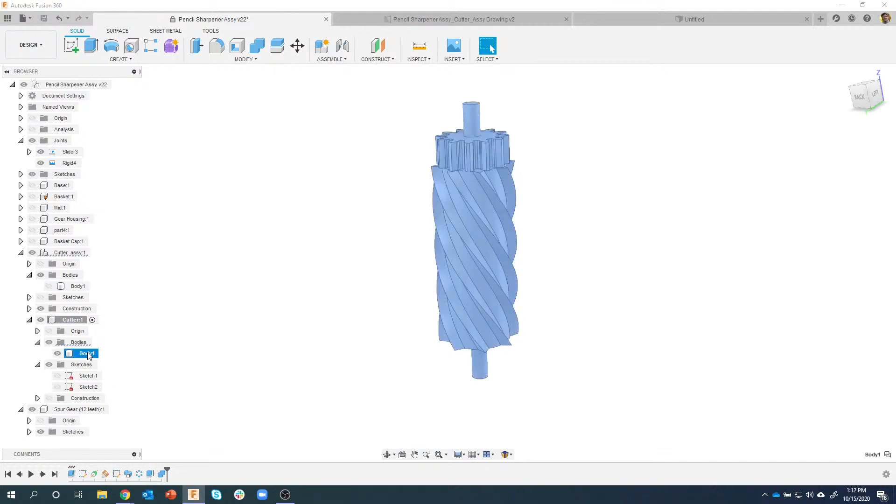And notice what happened to my spur gear. It's emptier. There's not a bodies folder in there anymore because it's all one body right here. So I don't need this. It's basically an empty component. I don't even need this sketch anymore. So I'm going to right click on this guy and say remove. Makes my browser look simpler. And you can see that that's been removed out of there. This is still all one body, so that's good.

Okay. So the last thing I want to do now is I'm going to go back to this cutter assembly. Activate that guy. We'll turn the body back on. We can see the cutter through there now. We can kind of see it's sort of coming up through this tab. I want to create that little pedestal. So I'm going to minimize the cutter. I'm going to expand open these sketches, and let me just find that sketch that we used to create that pedestal, and actually I lied, it's under the cutter, so I'm going to bring that guy back open.

I hope. Sketches. Okay. I need to find, running short on time, and so I'm trying to remember where everything, oh, there it is. I'm sorry, right there in front of my face. That's why I couldn't see it.

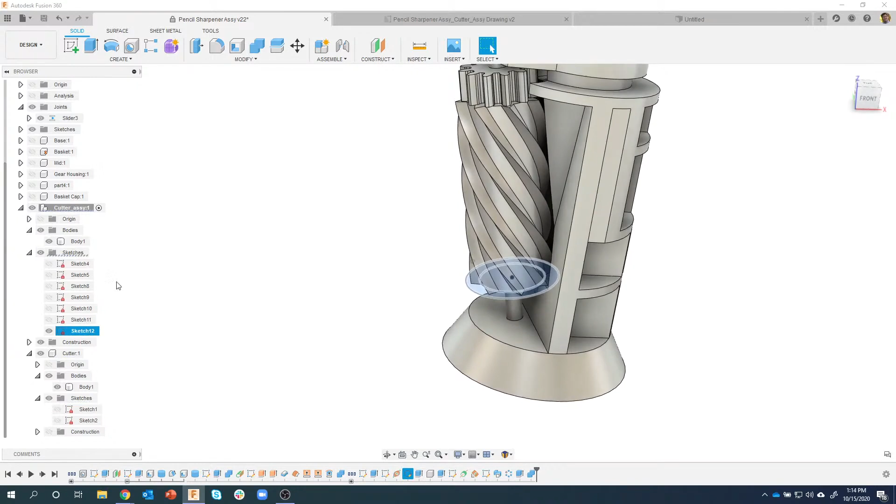Okay, so I want to turn that sketch back on, and we're going to use both of these profiles. So I'm going to grab both of those. I'll say extrude. Now notice I'm working on the cutter assembly because that's this part right here, right? This, not the cutter itself, but this guy here. So I activated my cutter assembly. I'm going to extrude to object right there, and I want to join.

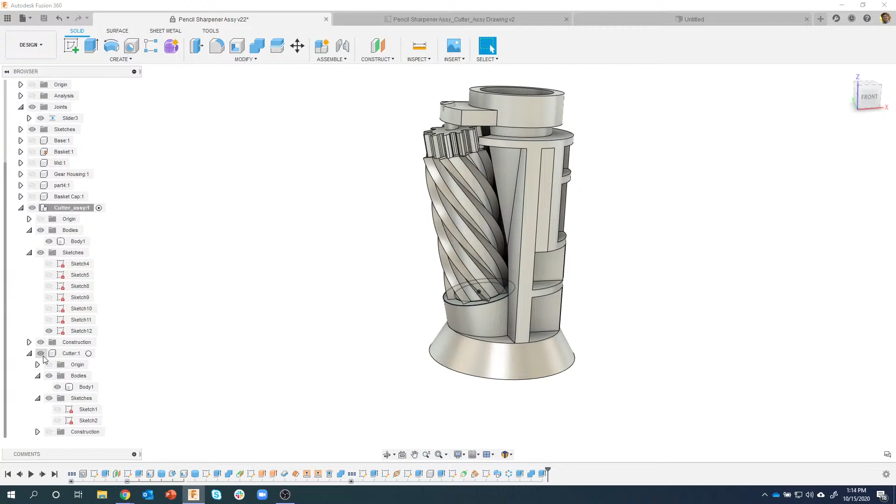Now you can kind of see it's going to extrude to that face, which is great. I'll say OK. And we now have, if I turn off that little cutter, you can kind of see we have a little pedestal that thing is going to rotate around. Okay, almost done here. So obviously we need to allow this to pivot. If I turn off this cutter, there's no hole for it to pivot in. So let me turn off that sketch to kind of simplify things. I'll turn my cutter back on.

I'm going to use the hole command. And check this out. I'm just going to click on this top face right here. And it kind of gives me a default diameter. And so it looks like it's blowing it away. So I'm going to drag this to be a little bit smaller here. Okay. I want to create a hole that is, oops, too far, centered. So I'm going to move this and make sure it's centered. And then I want it to be slightly larger than the shaft. So I'm going to come in here and say 0.092 according to the drawing.

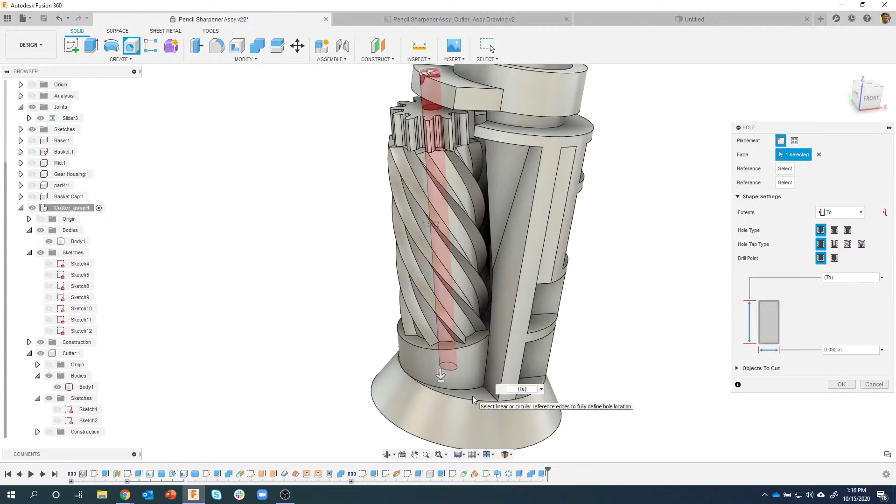And I want to go a certain distance. So instead of distance, I'm going to say go to this face. Okay, you can kind of see it's going to create a hole that's a little bit larger than the shaft, and it's going to cut through all of this stuff. Well, I obviously don't want it to cut through the shaft. So right here is objects to cut. I'm going to expand that open. I don't want it to cut through the cutter, so I'm going to turn that off. The only thing it's going to cut through now is the cutter assembly, this part here.

I'll say OK. Let's turn off the cutter, and you can see there's a hole that goes all the way through, but it didn't cut through the actual cutter itself. So that objects to cut is a really cool option. It's usually folded closed, but it allows you to specify what this hole is going to cut through. So you could have it cut through multiple parts at the same time, or just a single part if you wanted to. Okay.

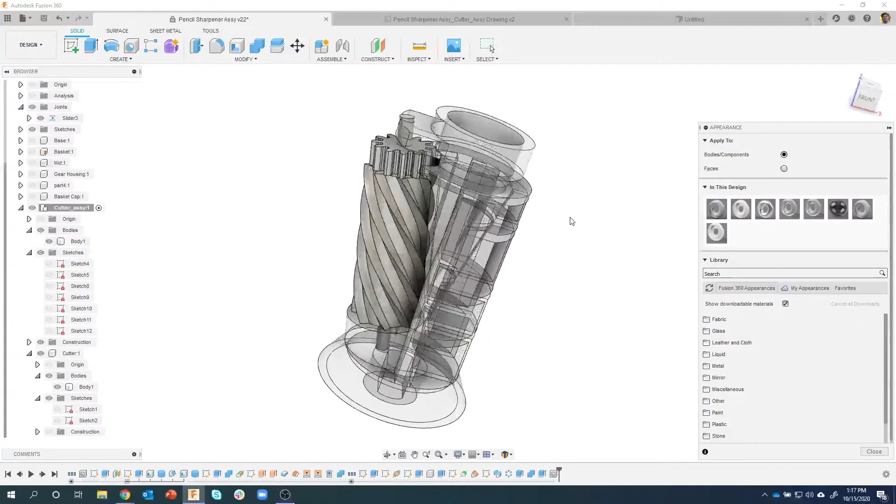So now let's go ahead and change the appearance real quick. I'm going to hit A for appearance. We'll drag this polycarbonate on there. We've used that before; that's kind of what it's made out of. And then for the metal, it's made out of steel because that's pretty strong. Let's just do a rough steel on there. Looks a little large, so I'm going to change the scale just to give it a little bit of texture. Kind of see how the light reflects off of that. And we are done with this particular part, with the cutter and those ribs and all that kind of stuff.

So hopefully you learned some new tips. I did a couple different things this time using the surfacing to create those complex ribs, and also using the surfacing to grow some faces to allow us to use those for doing the replace face. I apologize we went a little bit long.